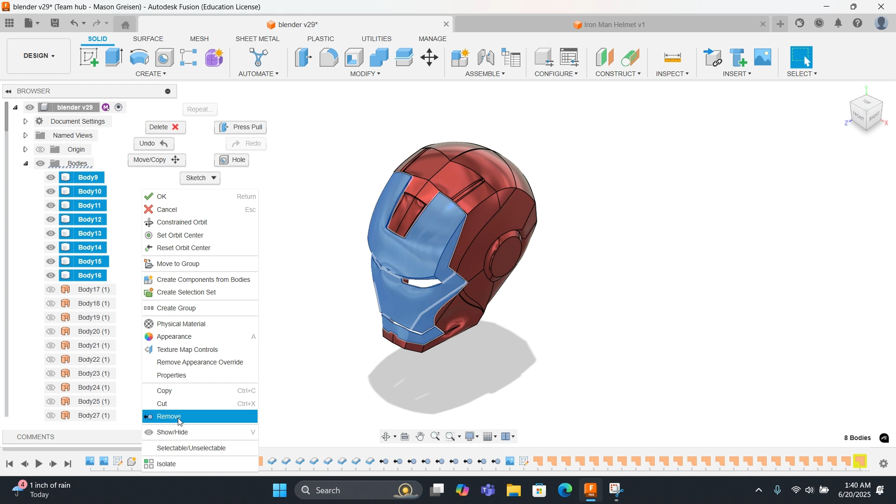Today we are going to be completing this Iron Man helmet. Right now, all we have is the golden faceplate, but in this video we are going to be making this part of it. And it's going to be less complicated than you guys think, but still pretty complicated. So without further ado, let's get into it.

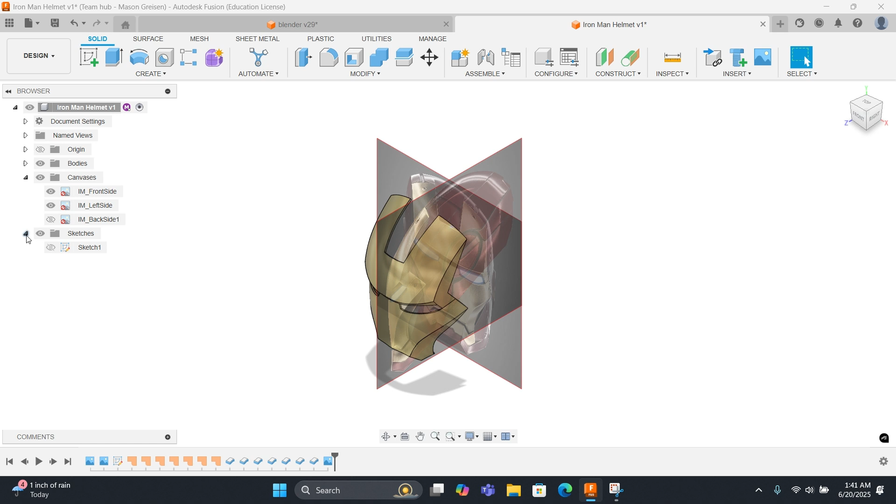And now what you're going to want to do is get rid of the other two, or actually just the front side one for now. Oh wait, actually we're going to use that backside one later. And for now, we are going to create a new sketch. So this was the first sketch with the Iron Man faceplate. And right now we're going to create a new one. And it's going to be on the same plane as before. Make sure this 3D sketch part is checked or else it will not work. Straight up will not work.

Alright, and what you're going to want to do is go to these canvases, get rid of the left side one just to not confuse yourself. And essentially what you're going to want to do is the same thing as before. What you're going to do is go to create, click on point, and on each of these red parts, you are going to create a point. So on every crevice, on every kind of corner, you're going to want to create a new point. So yeah, let's get started. I'm going to start it down here because this kind of seems like the easiest spot for me to do.

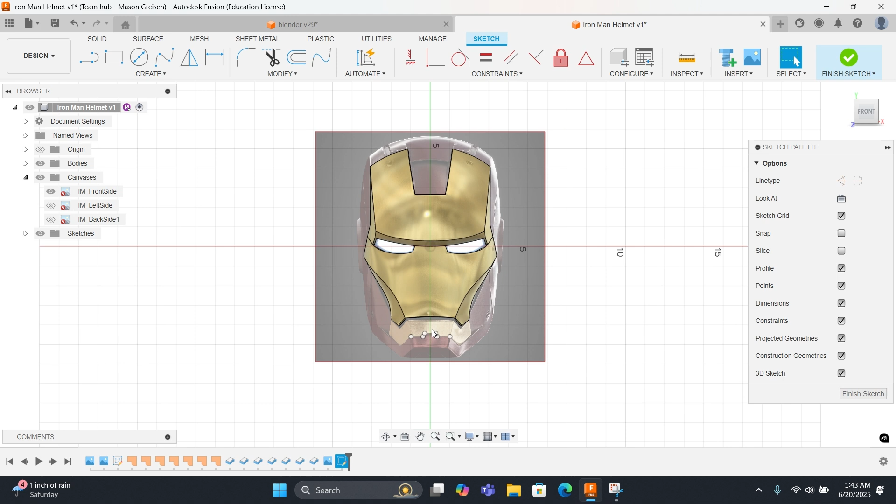So right there, and right there. Then kind of make these ones even. And that looks flat, so you're going to want to make it flat like that. Kind of just go right there and then it'll help you out. Then do that. And again, you want to not have these constraints on here, so make sure to delete them when they come up or else it'll mess it up later. And something that I actually forgot is that you're just going to want to do the right side of it. So I don't actually need any of these.

Yeah. Let's go back to the point. Put another point right here. All right. Then another one right here. Right there. Is that curved? Maybe a little bit. Let me add 3, yeah. Actually, nah, I'm just gonna make it straight because I don't think that's supposed to be a curve. It just looks like an image. Alright, right around there, there. And then you kind of want to zoom in and get these ones right.

And then I'm going to go back here, go in the middle, and then you can kind of see there's like a little indent right here. I'm also going to put one right there just because. Yeah, that looks about right. So I can do that. I'll put one right there and there as well, just in case. And then this one looks like a straight line, so I'm gonna go there. Then I can go up there. And then from here, I'm gonna go up here. And this is kind of gonna be a little bit of guess and check.

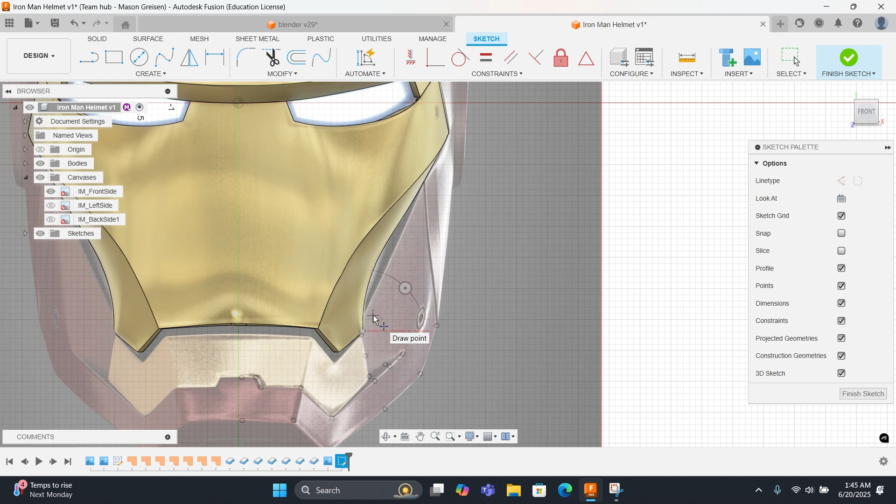Just a little bit. And then for these points, you do kind of want it to align with that edge. So you're kind of just gonna place it right on the edge a little bit. And I wouldn't worry too much about this part of it. This part's a little complicated when it comes to faceplate. I'm just gonna personally, for my Iron Man mask, line it up with the edge and not have this little indent here. Go right there.

Right there. Then I'm going to move this point just by clicking and dragging. That looks a little curved. I'll put another point right there. Again, for curved lines, you're going to want to do 3 points.

And then for straight lines, you just need 2 points. Okay, let me put one down here. Right around there. Let's go there. Let's drag that down a little bit. And then get rid of these constraints.

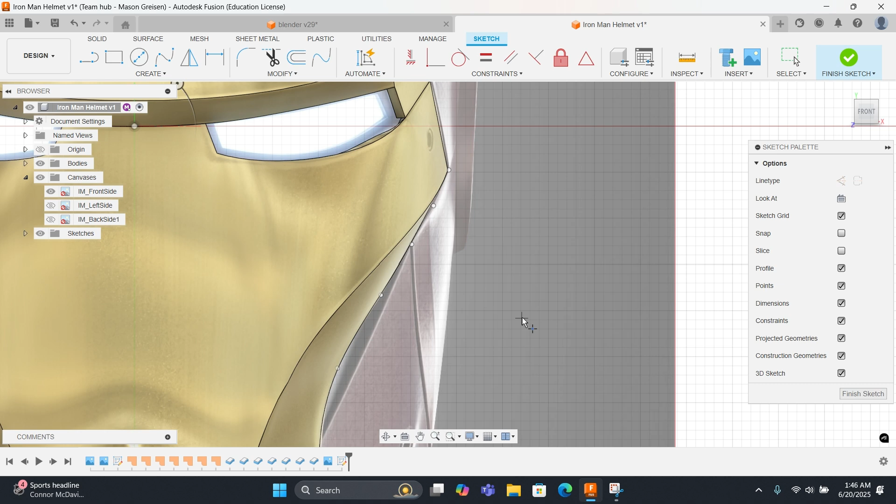And then these are the ears. We're going to get to these later. They're very complicated, actually. Kind of want to place one in the middle of the ear, on the edges of the ear. And then, yeah, that looks good to me.

Now we're going up from here. I'm gonna place it right there. Right there. Then up here. What would that do? That's fine.

And then again, get rid of these constraints. Just click on them and press the delete key. That should get rid of them. And then if you ever lose the repeat point, just go up here to create and scroll down to point. And you should be good to go.

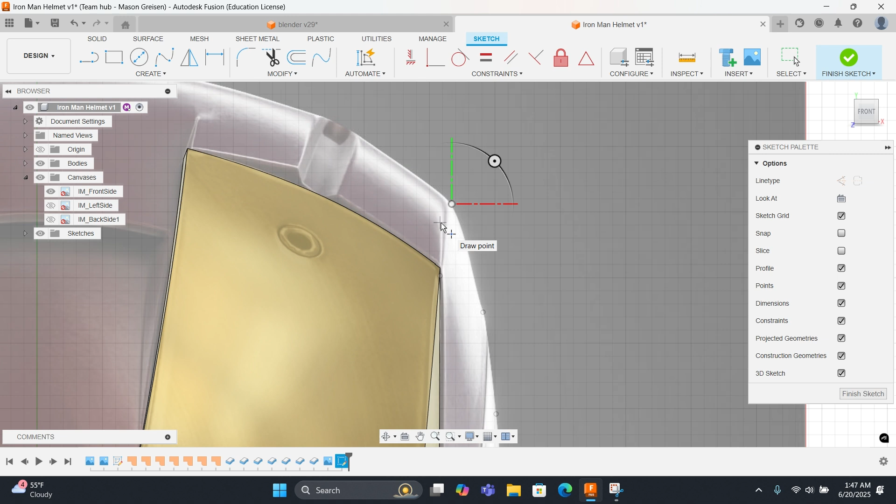Place some of these as well. Boom, boom, boom. And then on these lines, it's a little complicated. If you can't tell, they're kind of like the curves of the helmet. So I placed one in the middle there as well.

Then I'm just going to move this point, or did I even place a point there actually? Maybe not. Did I? Yeah, that's a point. Okay, I'm going to put that right there. Yeah, that looks good. All right, now we're on to the top of the helmet.

So we want one right there, right there, right there, right there. And this is kind of where it gets complicated, these sections right here. So I'm going to go over that in a second. Right there, right there. Boom, delete that one.

All right, and then just kind of go along the curve of the helmet. Remember, we do not need points on the left side. So just come down here, go there, and one in the middle. There we go.

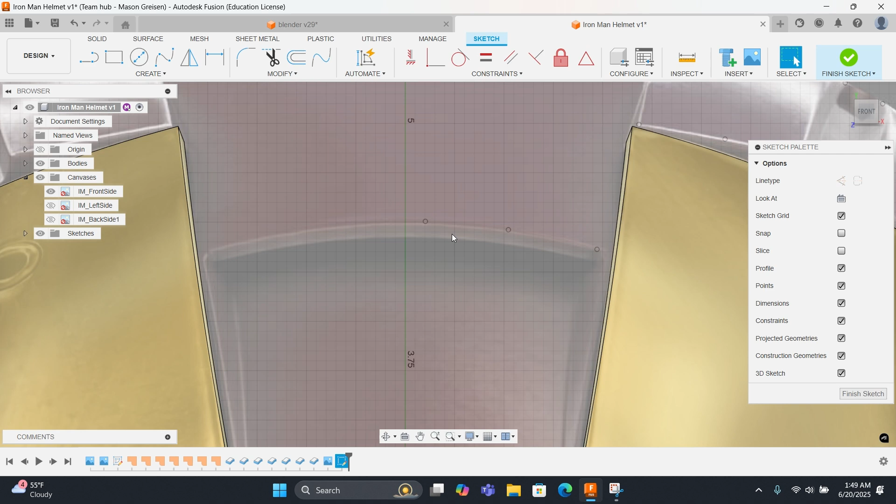I'm trying to remember if I want points directly in the middle or if I want it kind of to the right. I'm thinking it needs to be directly in the middle.

Let me actually go back here to check. Let me see. If I go down to sketches, sketch 1, yeah, all the points were directly in the middle. Okay.

So I'll delete a few of these, then create some new points, and just put it right on the center line. Sorry if I told you wrong the first time, that's my bad. And then delete that point, delete these constraints. All right.

Point, center, delete, repeat delete on that. Then put a point in the center, and I'm also going to put one right there. If it gives you trouble, zooming in usually does the trick. I did not even mean to create those. Whoops. Alright.

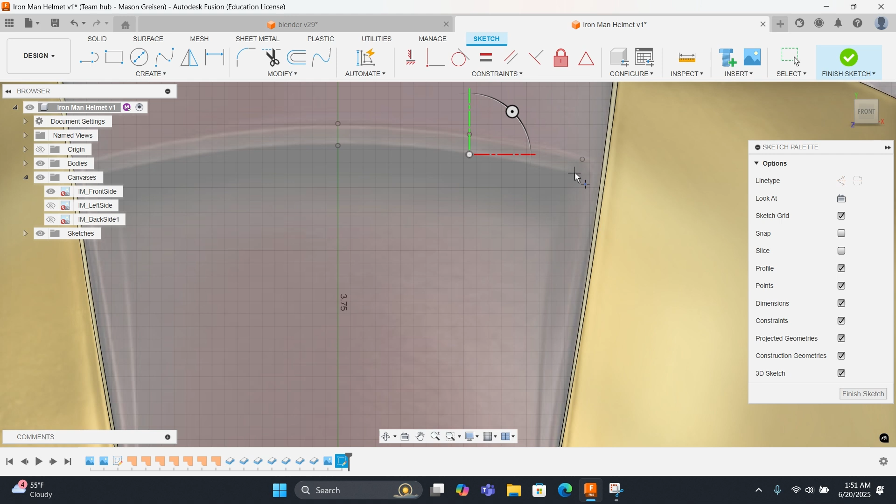Now, I need to make this. So, my tip for making this is to just do this part, that part right there, and then after that, I wouldn't even worry about like this indent right here. It's not worth it. It's just gonna make it really hard.

So then after that, I'm gonna put it right there, one right there, get rid of the constraint, and then put one up here, and right there.

And then the one that you actually do want to do is kind of this edge right here. So there's like an edge right there, right there, right there. That's it right there. And then the triangle kind of finishes right there. And again, get rid of the constraints.

All right, that's looking pretty good so far. So, yeah, this is looking good. Now we got to do this part up here.

So this part's super complicated, but it actually does look, unfortunately, it does look kind of cool on the helmet. So you want to place all these points right here, like I'm doing.

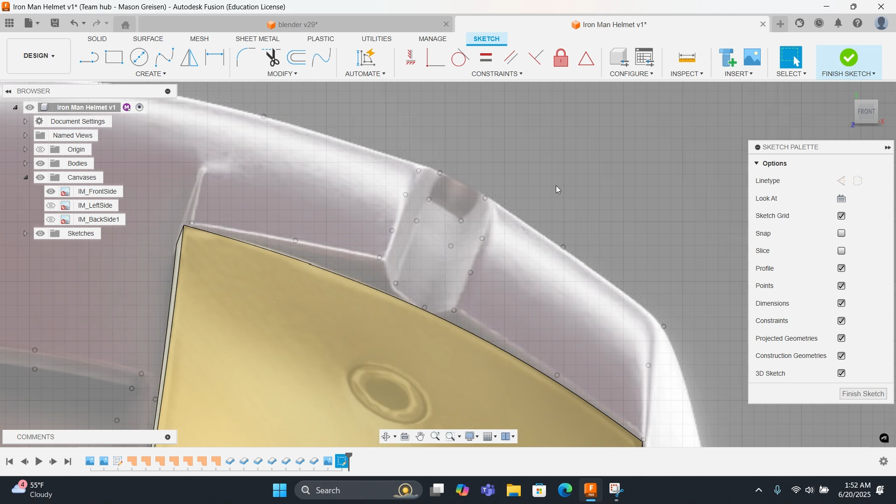Now what you want to do is you have all these dots in this plane, but you have to move it over here. Let me actually get rid of these bodies. Press V to delete them, kind of. And you just want to unhide this canvas plane.

Now what you want to do is go to your multiple viewports. It is loading for a minute. Okay, there we go. Basically go to your multiple viewports, and what you're going to do is zoom in over here, and you're going to select this and move/copy it.

I'm going to get the sketch palette out of there so that I can see the move copy. I'm also going to get the move copy out of there. Oh, it doesn't like that. There we go. Just so I can see more, you know.

So now what you want to do, that point is actually in the right spot, because anything like any of these that you see that are on the edges, they should stop - you should stop being able to see them on this plane. So you don't actually have to move most of those. That'll make sense in a second once you see the back plane, because you also can't see the back plane until here.

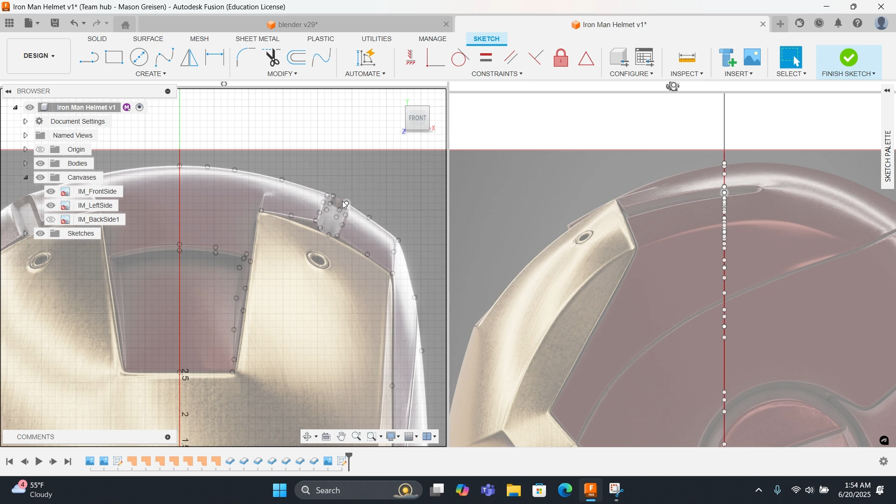So I'm just going to start down here actually, it'll probably be simpler. So this one, repeat move copy. It should be right there. Looks good. And this one, just highlight it, repeat, move, copy. And then you're going to want to drag it again. And you do want it to be in line with this one. So just kind of try to overlap them.

And this one, repeat, move, copy. And put it right there. Oh no, it's not good. There we go. And yeah, as you can see, you can tell where it's supposed to be just based off both the images.

So I think I'm going to time lapse most of this part because, yeah, you don't want to see most of this. Alright, I will be right back and I'll end the time lapse once it gets to some of the complicated parts, like up top and the ears and stuff.

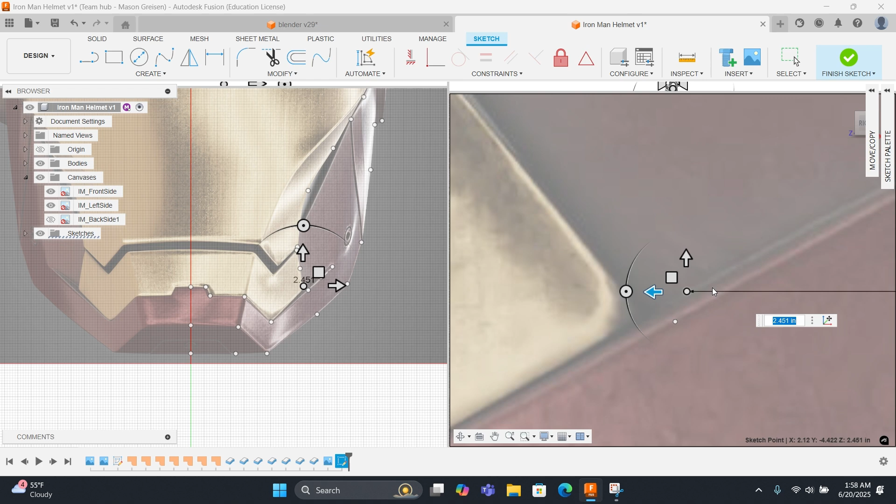Alright, so for this part, on the side of the face mask, or the side of the helmet, you can kind of see the depth right here on the reference pictures. Like, you can see this line goes right here, and it kind of stops there. That's all you need to do. Just line it up there. You can kind of see it right here too. And yeah, it makes sense when you look at it here too. So yeah.

And I actually forgot to add dots right here. This is kind of a texture that I didn't see before. So I'm going to add it right there, right there, right there, there, right there. Yeah, that looks good. Get rid of the constraints. All right.

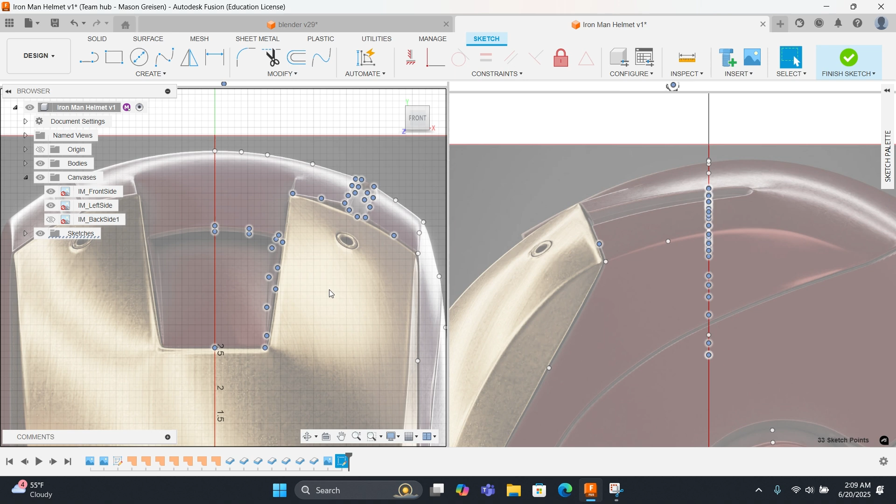All right, now we're back at the top, so we have all these points left. So what you're going to want to do for these points is kind of guess. I'm not going to lie to you, because you can't actually see anything right here. So you're going to have to guess for a lot of them.

Now for these ones right here, what I'm going to do is just move copy them. And for this one, I can tell it's actually right on the corner there, so you just want to put it right there. And then for this one, I'm going to start with the simple ones - you literally just put it right there on the edge.

Same with these, you can kind of tell where it's supposed to be - not really based 100% on this picture, but based on where it's already at in this picture over here. Because now you know that this has to be at this height, so you just need the horizontal distance that it needs to go. And once you get it there, it kind of matches up. Go right there with it. Yeah, there we go. And then I'm going to do this side of it. So these should be pretty much right next to each other, which they are - you can tell because they're just on top of each other right there.

I'm going to do this one. This one looks like it's a little bit backwards. It's alright, there we go. And I'll do this one. This one should be forwards. Yeah, it's basically right on top of that. So there you go.

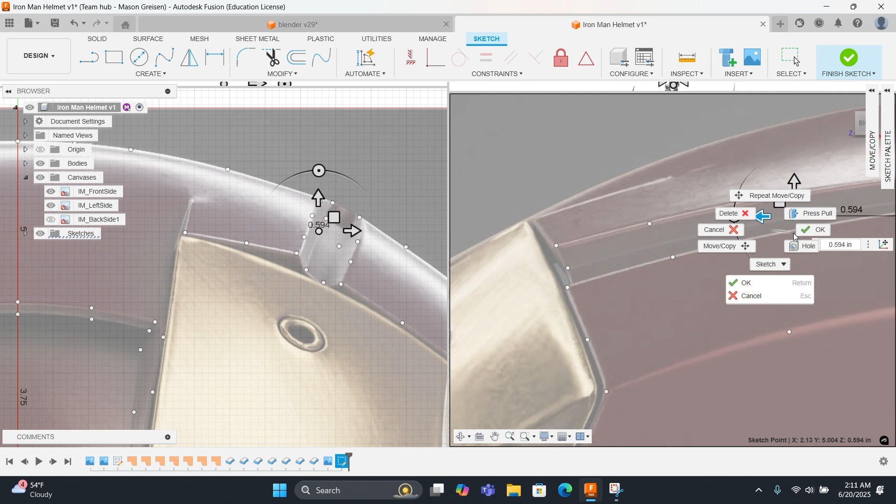I'll move this one as well. This one should go backwards. And for this one, you kind of have to guess based on this. I'm just going to put it, I kind of want a little bit of a forward curve, so like diagonal. So I think I'm going to put it right around there.

And now we're on to these ones. So I'm going to do the same exact thing with this one. I'm just going to put it back, but diagonal to this. So these should be right on top of each other.

And then for this one, I'm going to do something similar. Where is that one at? It should be... backwards a little bit, I think. Yeah, because this one, hang on just a second. Oh no, it should actually be forwards. It should line up with this one right here.

So basically, you're just doing all the ones that you can see, and then the other side should be symmetrical with it. So I'm going to line that up right there. And then this one can go forward. Should be lined up right about there with this one, just diagonal with it.

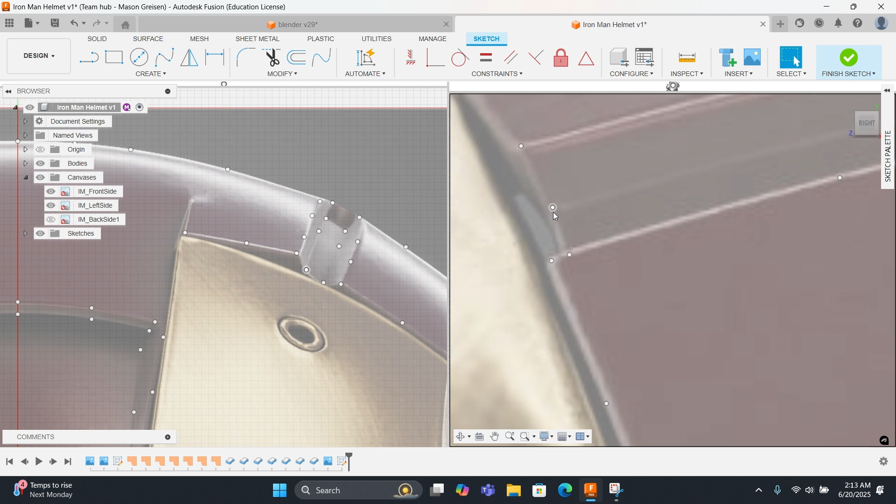Alright, and that's actually most of them done for this section. Now we're on to this section. So I'm just going to do the simple one, moving that to the front of the helmet. And this one to the front of the helmet. Right there. Alright.

And to kind of double check our work, what I'm going to do is this, so we can kind of see what we've done so far. And yeah, that looks pretty good. I'm looking at these dots right here, and you can kind of tell that it's like a little line of dots that has a little tiny indent. Yeah, that looks pretty good. Alright, back to normal.

Alright, so what are we on now? I think we're on these dots over here. Yep, because all of them are still in that plane. Alright, let's start with the ones that we can see. I'm going to do this one. I'm pretty sure that that's this part sticking out. I'm pretty much positive.

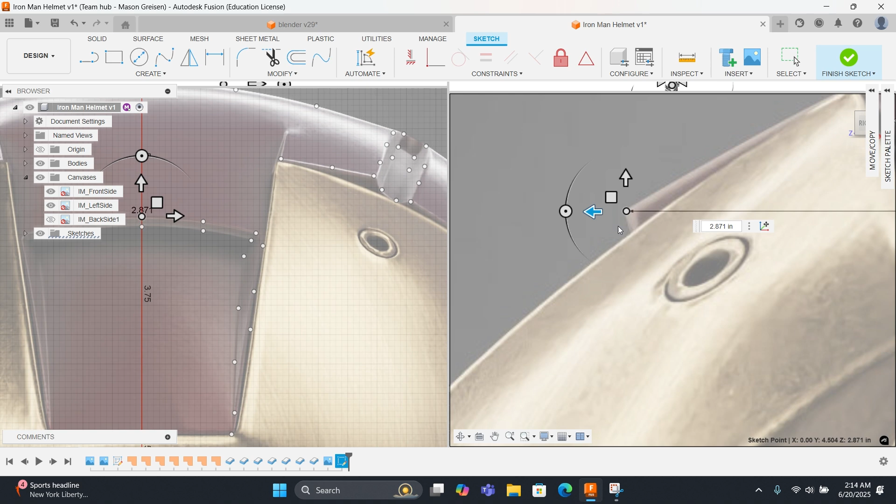And then we can do this one again. It's going to be on that curve. And now I think we're to the point where we can't actually see it. So what I'm going to do is just keep following the curve. I think it would curve down like that because it's kind of going like that so far. And yeah, I'm kind of just guessing here.

And this one, I'm just going to do perfectly in line with our first dot, just straight up and down. There we go. Then I'll do the same thing for this one, except obviously the second dot. That looks good... for this one. Boom, right there.

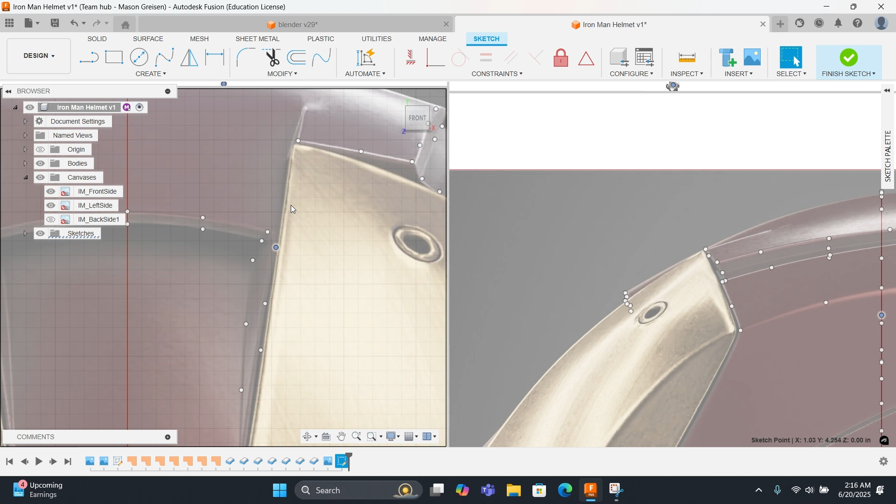And now we're gonna have to do this side. So I'm just gonna line this up with the edge of that, because we should kind of not be able to see it, but you kind of know what I mean. I feel like that should be more lined up than that. Hmm. Yeah, I'm gonna put it a little further back, kind of right there.

And then for this one, we're gonna move it again. Just right here. Kind of following this curve the same distance away as before. If it's the same distance, it should be about there.

And then we're going to do the same thing here. We'll move that to right there, kind of right before the glare. Just the one we just moved, okay. And then eventually it should get down to this corner right here, which it's almost there. This one should be at the corner.

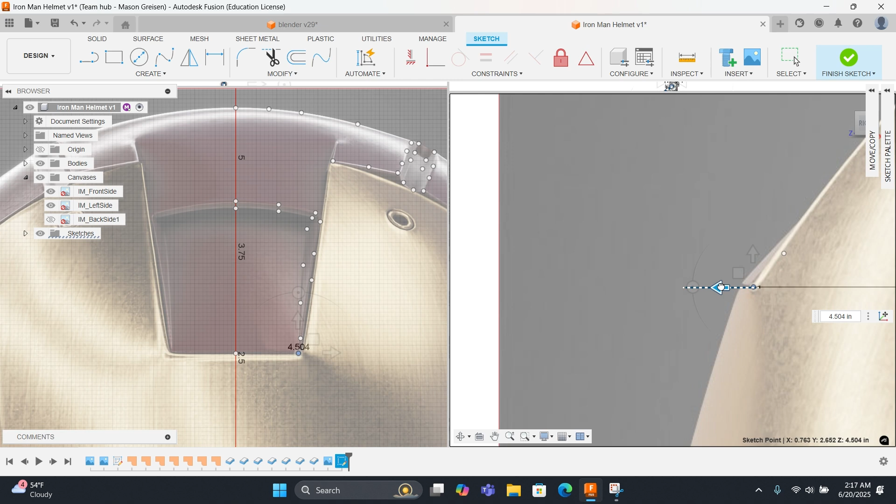There we go, perfect. And then it kind of sticks out a little bit for this one. So I am going to not put it perfectly in line, but actually like that, so there's a little bit of curve to it.

Now for these parts, what you're going to want to do is kind of eyeball it. So this is that one, and it needs to be down and to the left of it. On this screen we can only go down, and on this screen it's to the left. So that should be right.

Then we'll do the same thing for this one. Should be down a little bit. Down and to the left of this one, so I'm going to go right there - that's my best guess.

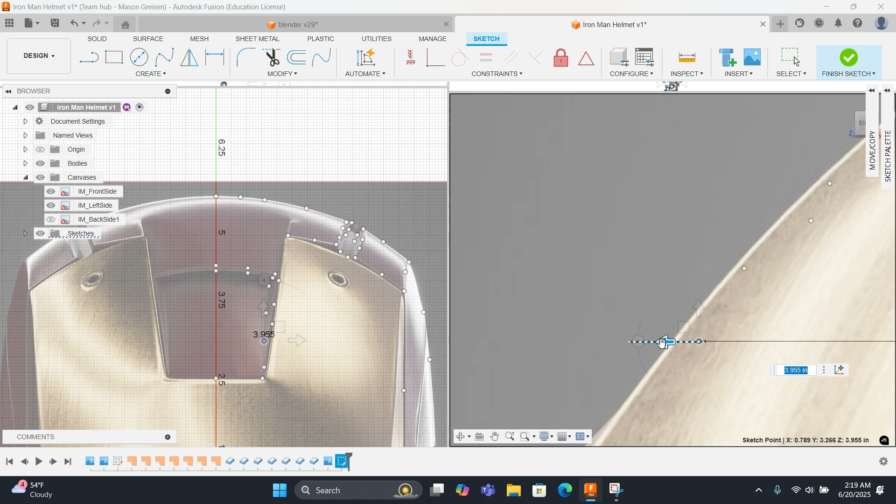And then I'll do this one. My best guess for this one is right there. If that one's right there, and that one's right there, and this one should be right around there. Looks good to me.

Is that all of them done? Or are these two? Yep, those two are right there. Then these ones are right there. That's fine, because that's all that you can see right there. Except I am going to put it a little bit more in line on this side. So this should be right there, and that should be right there. There we go.

All right. Now, what we want to do is kind of check if everything looks right.

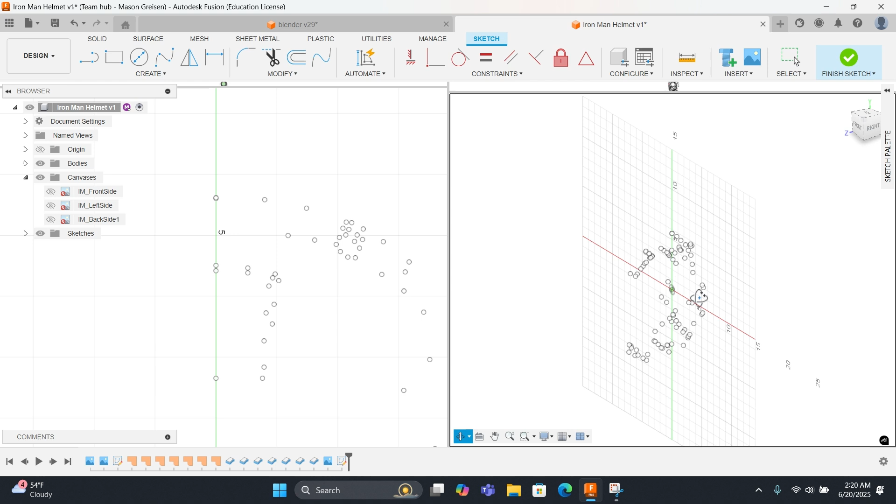And you can kind of tell that this is looking like an Iron Man mask. These all look good up here. These are kind of like the more complicated ones that we did, and they look pretty good to me. I have no complaints, honestly. And then this part looks good as well. You can kind of see a general outline - you can tell that's a face mask, especially if you put this with it.

Yeah, that looks good. Alright, let's keep editing the sketch though.

So now, instead of using this - whoops - instead of using this, we are now going to use this. You're going to want to flip to the back side. And now what we're going to do is put a bunch of dots around here.

So what I'm going to do is get out of the multiple viewport, go single view, and I'm just going to put dots wherever I feel is necessary. So we want to go to the back face, and I'm going to put some dots right here, here, here, here. And I'm not going to worry about all this.

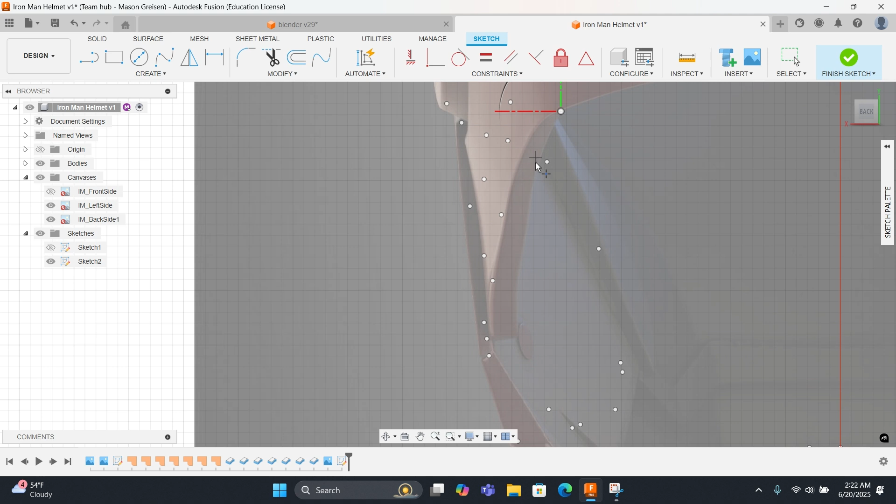What I'm going to do is base it off of this edge right here. So I'm going to go right there, right there, right there, right there, and there. And then all that is the front, so we don't actually need anything right there.

What we do need - see, where did I just create a dot at? Right there. Redo point. Do I need these ones? Yes, we do. Okay, we're good.

I'm gonna move this one. Wait, is that the one I just created? Yeah, it is. Okay, I'm gonna move that one right there. Then delete this constraint. Okay.

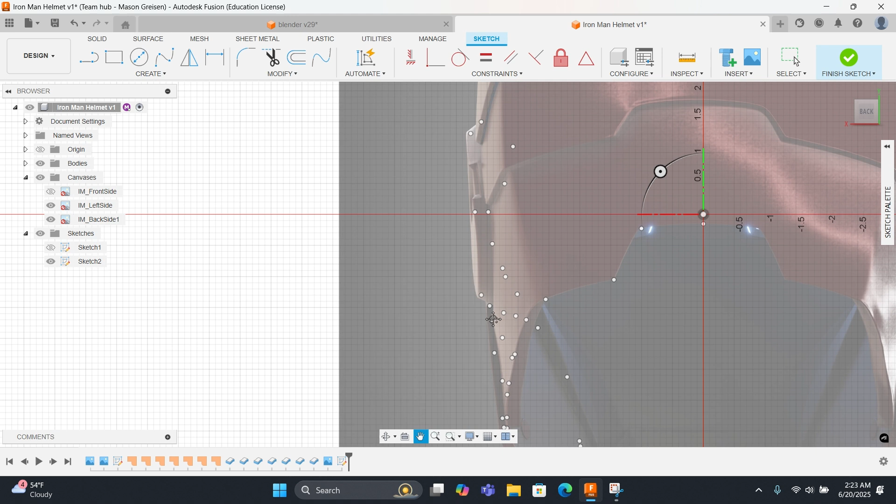So the most important part of this one for the back parts is going to be kind of going up the side here. So what I'm going to do is go to the ears, put a point right there, and right there, right there. Actually, I really don't need that point - we already have those side points. But you do want to put points on the back of the ears, so right there and right there.

And then the other parts that you definitely are going to want to do is straight up the middle right here. I'm going to do it right there, right there, right there, right there. And then up here, we already have points for that part, so I'm not going to touch that.

But every point that I put in the middle, I am going to put some points kind of like for here and then here. So you're going to want to do - where did I put this point at? Yeah, what you're going to want to do is put some curve points right here and then right there.

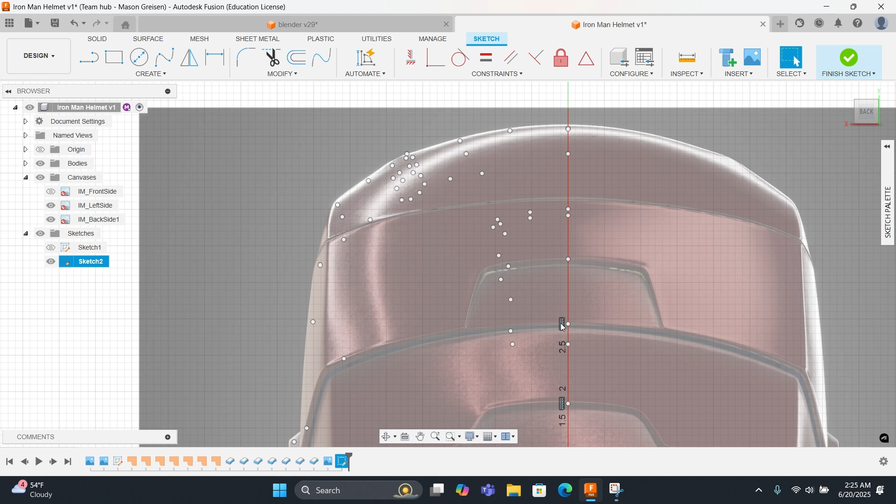And get rid of these constraints, they're just going to screw you in the end. So basically for each of these points in the middle, you're just going to go out and put 3 points total. Boom, boom, boom, boom. One in the middle and one on the edge.

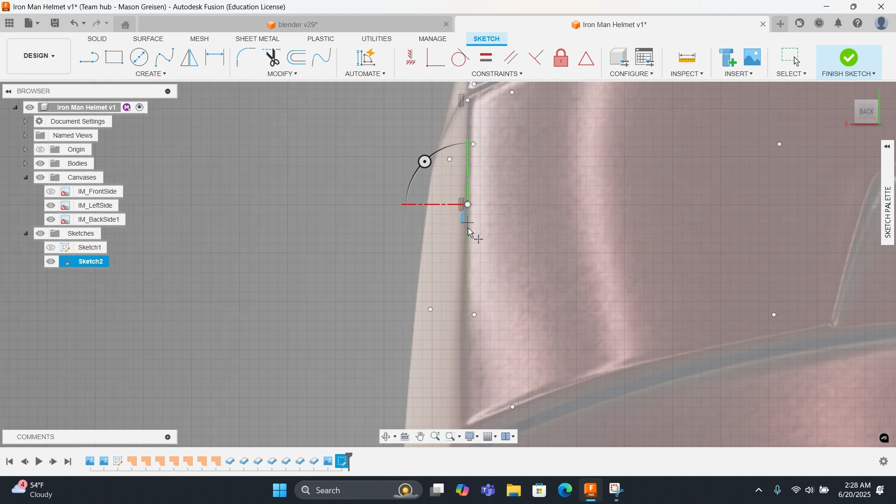All right. And then after that, you're going to want to add some points over here - kind of this curve right here and this curve right here. So you're going to go along this curve, boom, boom, boom. Delete that constraint. And then along this curve, boom, boom, boom. And along this curve.

We'll probably connect these two. This one, what is this one? Nope, not that one. All right, now you're going to want to go back to your multiple viewports. And if I miss something, I will definitely go back to it. But I think that's everything.

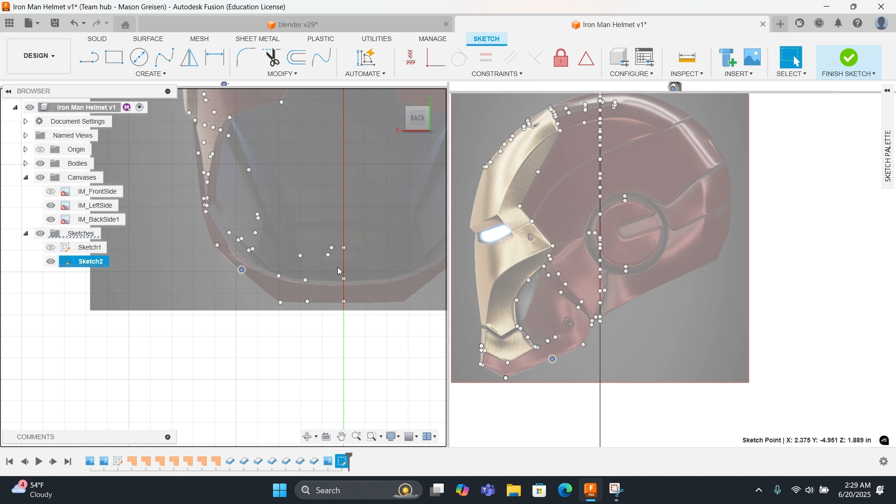So this one, it's just up there. It's also up there. Flip that around. Yeah. I'm going to start with some of these. I'm going to start with this one. Seems the easiest. All right. So that one, you can tell, is just right there. Along with this one. Around the same. Right there.

And this one also goes back there. And we need a few going down here. I think I placed a few. Yep, right there. Just gonna go back here. And maybe this one. Yep. Goes right there. It's good. This one goes around there. And this one does the same.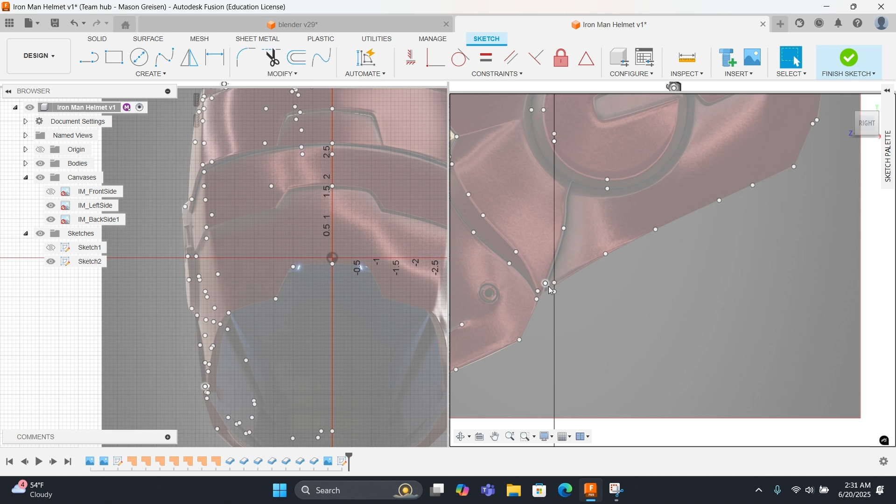We got a couple of these ones. This one doesn't go too far, it goes right around there, and then this one goes in the front, right there. That looks good. These ones should be the ears, yep. The outer ear. I actually placed these in almost the complete wrong spot. These need to be way up here. Just even the ear, man. What is this? Yeah, those two are the first ears, and then these two are the second ones.

Okay. What I'm gonna do is I'm gonna move them up to the first ones, because goddamn. Then I'm gonna put them back here. Put this one over here. Yeah, that looks about right. All right. This, you can't exactly tell where it goes. So I'm going to put it right there. That looks about right.

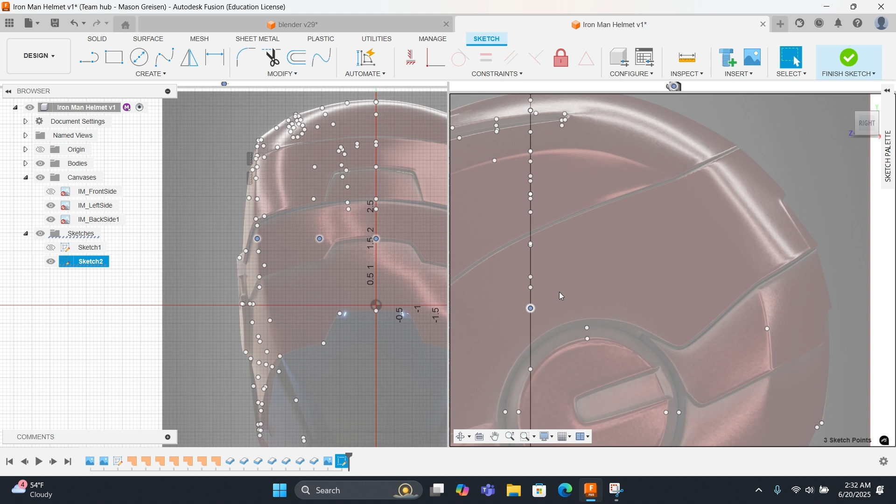And this one, that's actually 3 of them. Okay, I'm going to start with this one. I'm just going to put it right there. And this one, I'm going to put it in the center, right around there. And this one goes at the back where you can barely see it anymore on the screen, which should be right there. Yep, looks good.

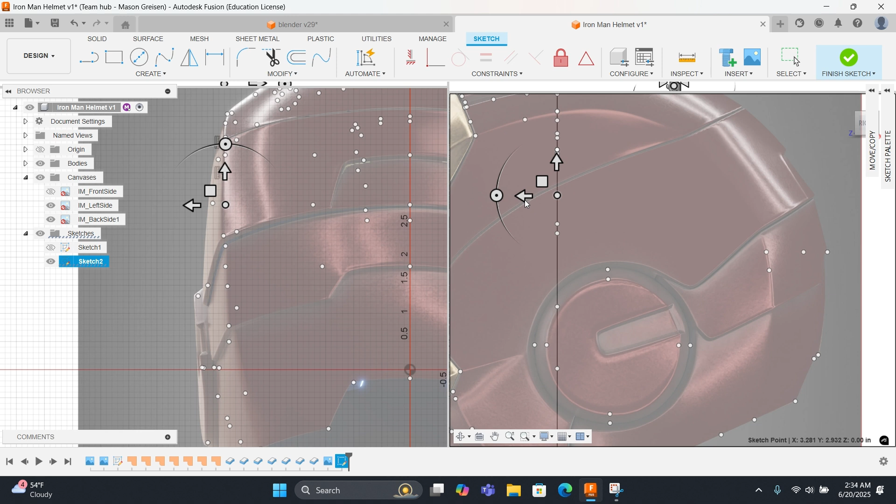This will probably be 3 as well. Oh no, that's just one of them. What's the next one? Also just one of them. Interesting. Not exactly sure if I need those. Let me see. Yeah, I'm gonna put this one right there. This one, oh no, it's not good. This one right there. And then this one right there. Alright, sweet. And this one will go right there.

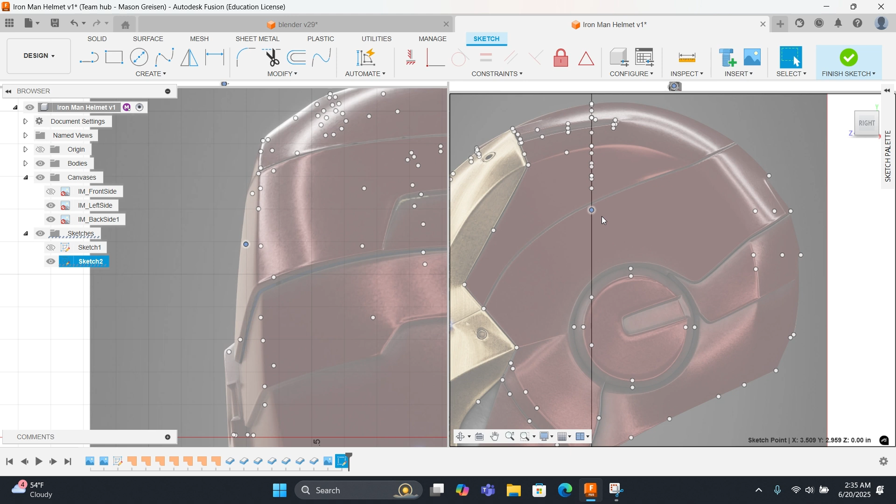Not that one. What is it? I'm wondering if this one is actually from the front. Yeah, it looks like it is. Wait, no it doesn't. Why would that be there? Why? Yeah, I am just gonna delete these because there's almost no point in them. Yeah, this one looks like it should be also pointless. Damn. This one. There we go. That's something useful. This one will go right there on the edge. Whoops.

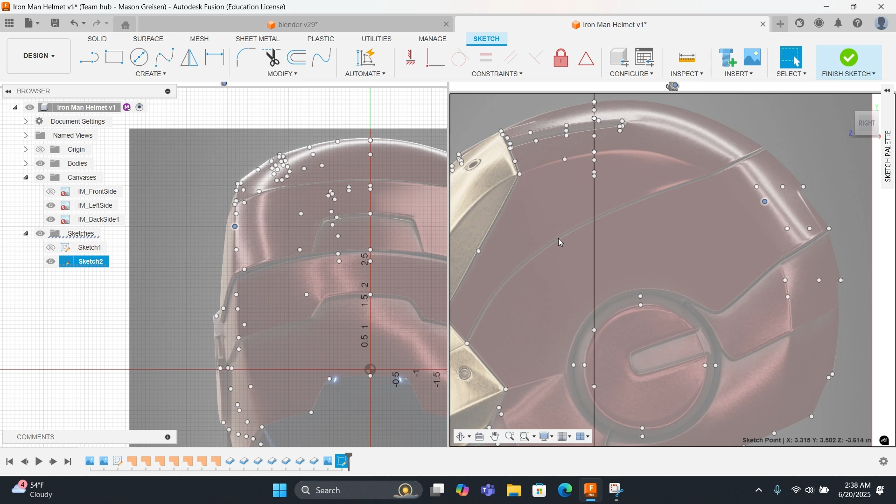These 3. This one doesn't look very useful. Yep. Yeah. This one should be in the middle, right there. This one should be on the edge, right there. What is this? Okay, looks good. I'm gonna guess that goes right there. Not exactly sure though. Alright, let's get these in the right places. This one should go all the way back. This one should go in the middle. And this one, I think it was, maybe, yeah, this one, go on the edge. There, where it is. Okay.

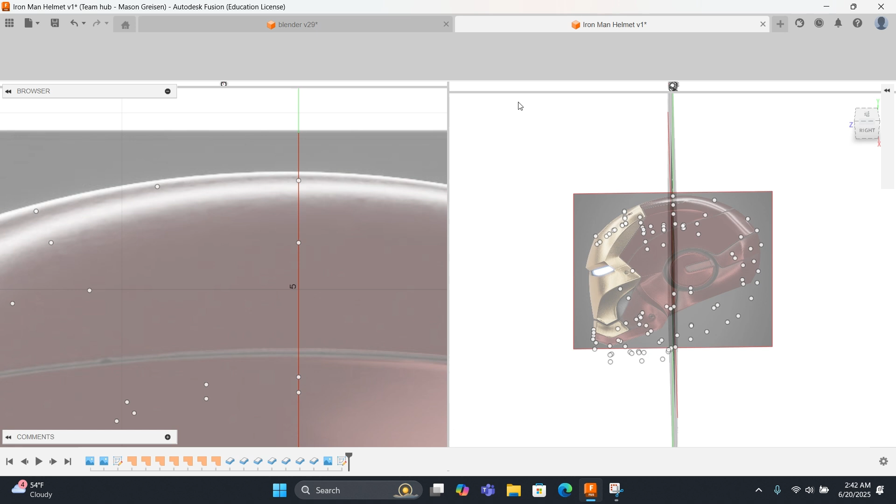Okay, now what I'm going to do is compare all these dots to all the dots I have on my other one. So it's looking pretty good. Yeah, I think it's actually time to start connecting, and if we're missing a few dots, then we can add them. Alright, so here's what you're going to want to do to connect them. Go to the side view on this one, and then the front view on this one, and you're going to want to get the front side view back and just kind of rotate over here.

And you're going to use the fit point spline tool. We did this in the last video, so it should not be too hard to remember. But as you can see, I just completely messed that up. So I'm going to go fit point spline, click on these three dots, and boom, there we go. As you can see, it worked over here. Then we connect these two like that, because that is a shape that we want to make.

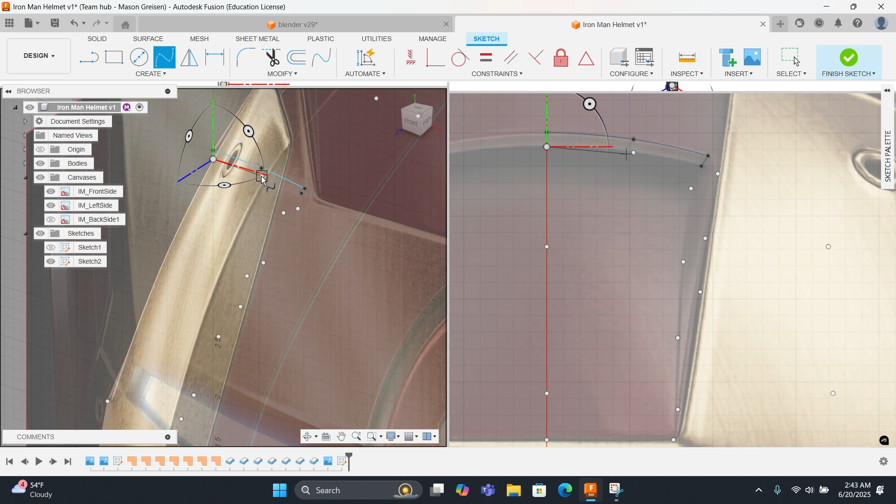Looks good. Looks good over here as well. And then I'm going to angle this the other way, just to make it a little better for me. So now what we're going to do is connect this with this, I think, and then that one and that one. That would go over here. Yeah, it does. Sweet. Perfect.

And now what we're going to want to do is connect. Where did it go? There we go. Connect these three, and then four, like that. And it looks pretty good right there. And then I think I'm going to connect this to that, like that. And then this one to this, like that. Does that look good? Yeah, it does.

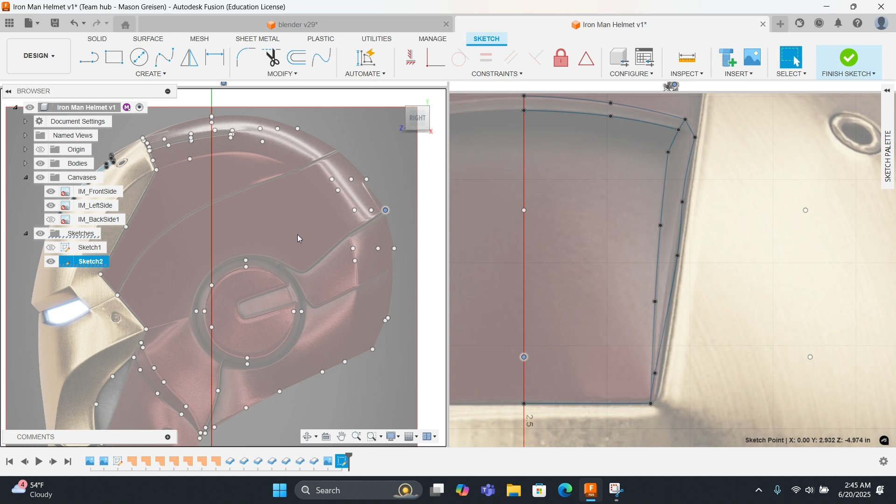Sweet. Now I'm going to go back to this view, how I had it before. I'm going to connect here to here. Oh, did we not move one of the dots? Where is this dot? Oh, we moved it back there. Oh, no, that's just the wrong dot. Okay, that makes sense.

And if you can't tell, when you do the fit point spline, you can't actually select anything until you shift and middle mouse button over like this. And then now you can select any of the dots. It just has to be slightly angled. So now we're going to want to connect this to that, to that.

Why does that look so weird on this screen? Oh, because it is. Because it's really just here to here, right? Yeah, because this dot is in the back and so is this one. Okay, yeah, that looks good. What other dots do we need? Okay, fit point spline. Now we go from here to here, I think. Yeah, looks good. Looks good to me.

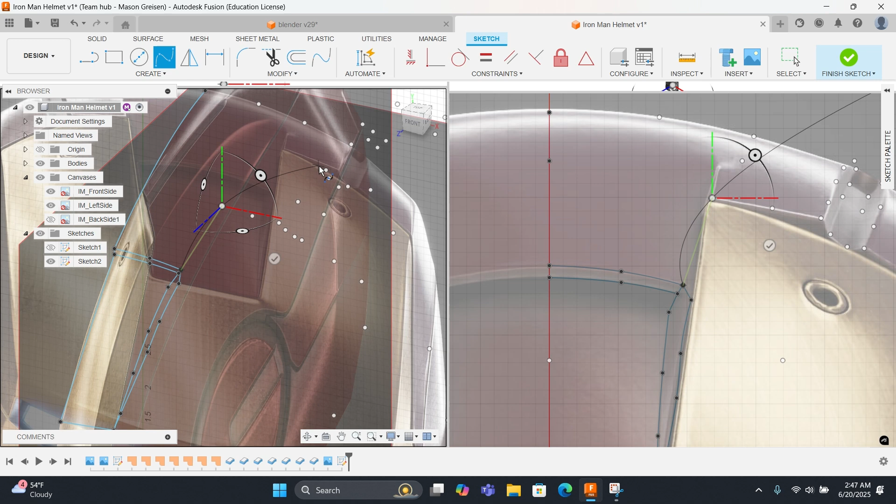All right, next up is these. So I'm gonna go from here to here to right there. No, to right there. Because this dot is in the back. Yep. Okay. Sweet. This is gonna take a very long time.

I think I split it up into multiple sessions the last time I did it with my other Iron Man helmet, because that's how hard it was. It was multiple days of designing. But I'm trying to put it all into one video for you guys so I can make other videos on how to make the actual Iron Man helmet in real life. Hopefully this video is less than an hour. That's kind of my hope right now. I don't know if I'm going to get it to that, but we'll see.

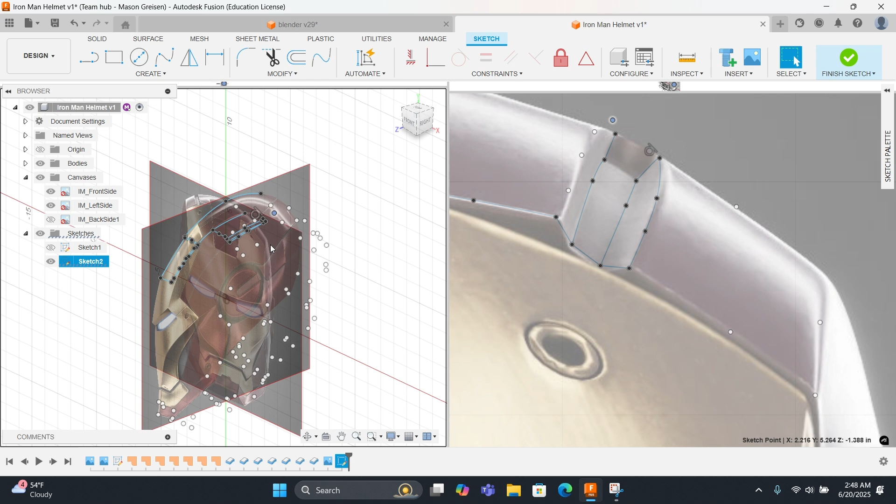There we go. That'll go right there. And this will go to the front. This part's a little complicated, so bear with me. But it's looking pretty good. This should go right there. And what is this? Shit. What is that dot? Okay, that dot's in the back, right? Yeah, it is. Okay. Don't need to connect it to there.

Damn, I'm doing it way too much. Okay. Just do a slight movement. There we go. I'll connect. Oh, I didn't move it at all, actually. Okay. Connect there to there to there. Oh, misclicked. Okay, there to there to there to there. Okay. And then I think it's from here to here as well. And just from there to there.

Actually, I kind of want this all to be one thing. Yeah, definitely. So I'm going to go from there to there to there to there to there. Okay, there we go. Perfect. Looks pretty good so far, in my opinion. Alright, I'm gonna go from there to there to right there, I think. Yep.

And remember, look at both screens. That's how I'm able to do this so fast and how I'm able to tell if the dots are right. Also because I've done it before, but you know, also the other thing. Point spline there to there. There we go. I don't know why I was curving so much before. That was crazy. There to there.

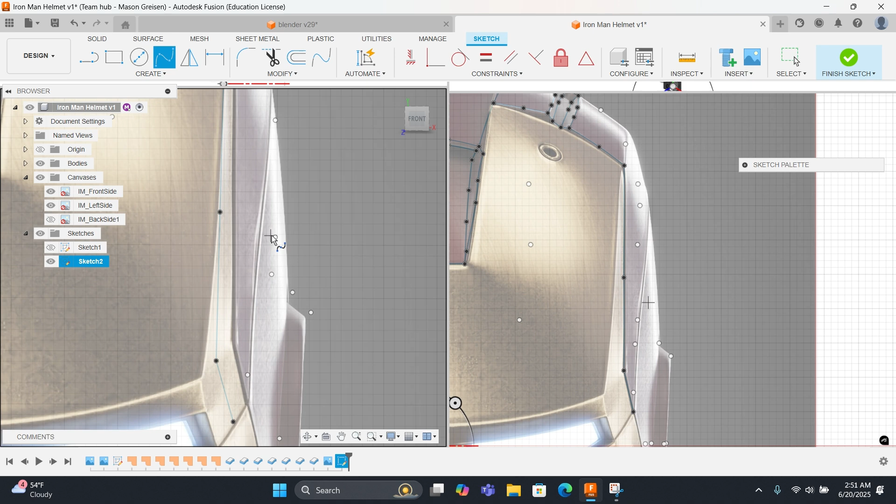Okay. Let's do some more fit point splines. That's right there. I think it's actually... okay, yeah. I don't want to do that yet. That's the back part. Might want to do this part. Maybe not. I don't really have anything connected to, actually. I need a point right there. It's fine. We can add a point right now.

Let's add point. Boom. And then move the point to right there. Alrighty. Fit point spline. I'm going to go from there to there to, where is it? No, right there. Damn, right there. Fuck, is it? Is it not updated or something on here? I don't know what happened. Where is it? Oh, there we go. Okay.

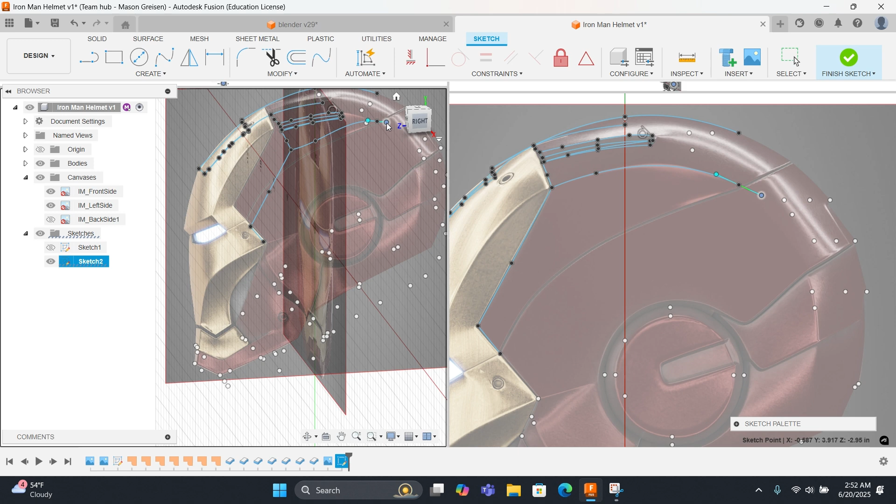Okay, I'm gonna start down here now, which means I need to go like that. Okay. Go back to front, curve it a little bit, fit point spline it. And most of these are straight, so you're just gonna wanna keep repeating fit point spline. Hit OK to get rid of those green things because they kind of get in my way a little bit.

You saw right there, I tried to get greedy. I tried to do multiple in a row, and it kind of just messed it up a little bit. Go right there. Yeah, that looks good. Maybe right there. Yeah, there we go. Try to get greedy by doing multiple in a row while wanting it to be straight, but it curved on me. Is this? Yeah, that is good. Sweet.

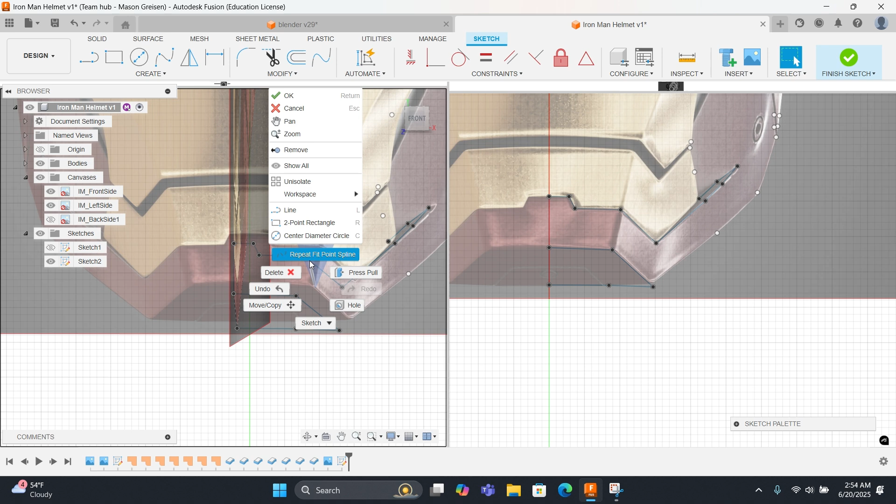Not that one, but this one we need a line connecting. There we go. Yeah, if you ever see those things get in your way, anything, just zoom in and out. That's kind of the easiest way to do it. All right.

And this is going to be an S curve, I think, so I got to do from there to there to there. Nope, shit. Yeah, from there to there to there to right there. And right there. Yeah, that's perfect. Sweet. There we go. Where is this dot? Back there. Okay, we're good.

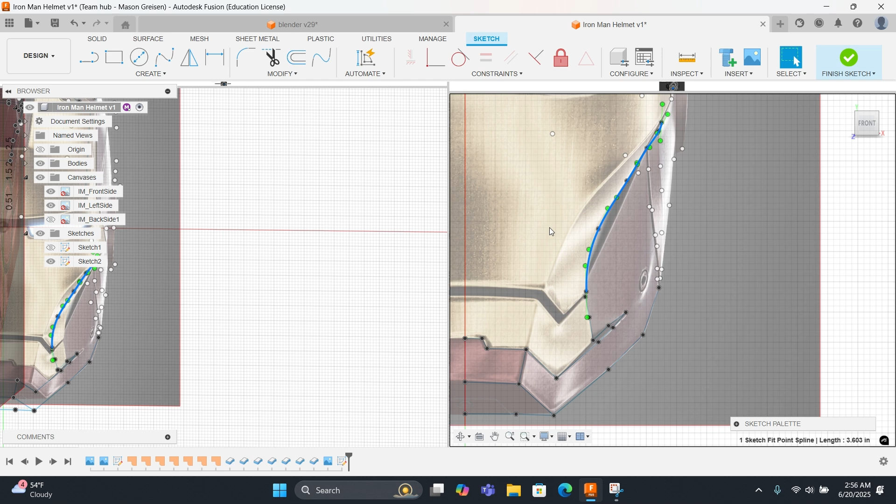Okay, now let's do some of this stuff. A little too curved for my liking. Okay, there we go. There to there. Zoom in on this thing. Okay, that is kind of a curve. Where is this dot at? Back there, that's what I thought. Okay.

I'm going to switch to the side view now. Yeah, there we go. Perfect. So now we can see where the dots are at. Okay, let's start right there. Right there. It's right there, to there, to there, to this one.

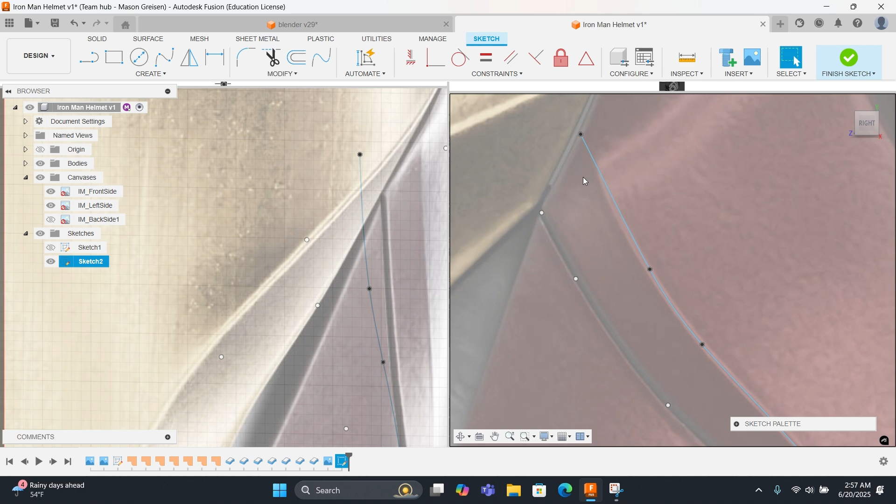Why is that like that? What is happening? I'm just gonna get rid of that dot altogether. Fuck. Okay. So I got rid of that dot, which means I have to redo this part. So I'm gonna go from there to there to there to there to there, I believe. No.

Nope. So the thing about this is when you patch it, I want to make this a section. So this and all this is going to be a section, and then this is going to be a separate section. So I can't combine this with it. I can do that separately. But if I try to do that, then it's going to screw up the patch job later, essentially. And it has to be a closed patch as well. So last time I ran into trouble where I didn't close that off, and it kind of screwed up a lot of stuff. All right.

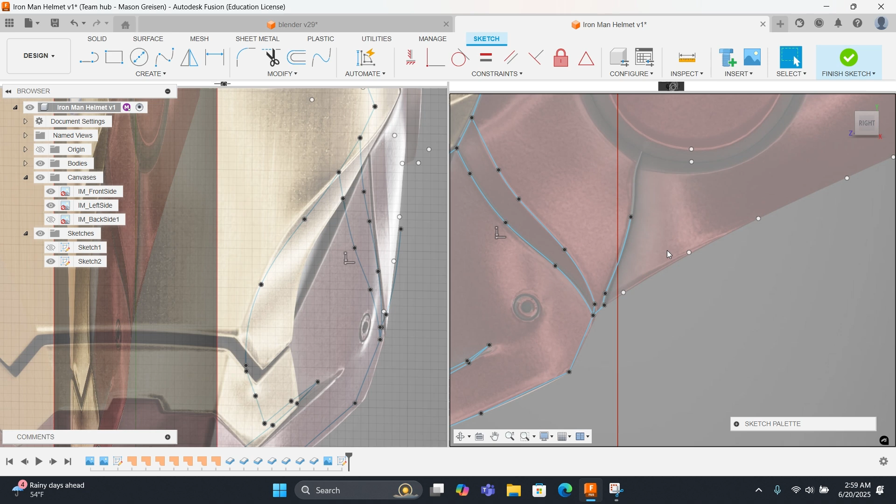Looks like this one's actually a little angled, so I can actually just kind of do it easier over here. That's nice. Okay. Go from there to there to there. Then I kind of want that curved. Okay, that looks good. There to there to there. Little curve is good right there, I think. And this should be straight along with this.

Okay. Now we are on. What is happening here? Oh, I did it wrong. Uh-oh. Did I do it wrong? Oh no, that's fine. Yeah, it's good. Now we're on to the back. So I'm gonna do that and that. Go to the back. There we go. Okay. So I'm gonna switch that like that. There we go. Then I think these three connect, these three connect, these three connect, and then all these connect.

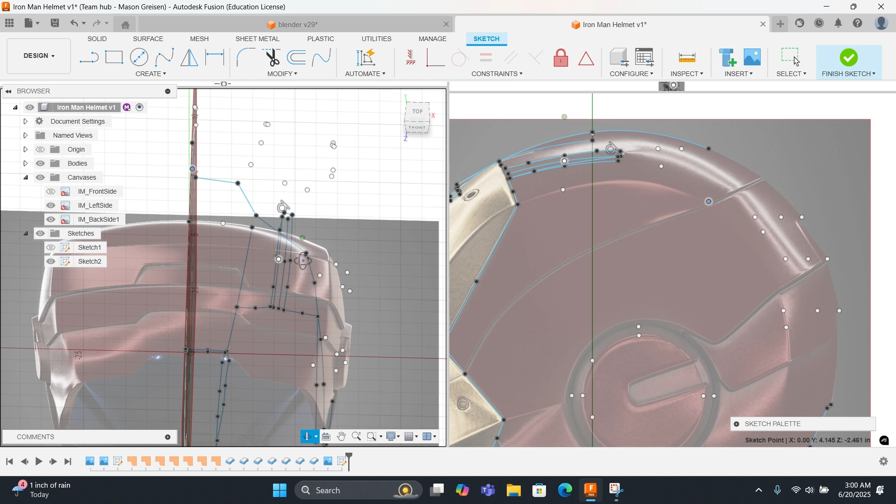What's happening here? Is that how I want it to look? Not exactly sure. Nope, that's not good. There we go. Okay. Okay. So that is actually just a random point in the middle of nowhere for some reason. What is that? Oh, I never. Okay, I see, I see. So I never actually moved it to where it needed to be, left to right. Think that is good.

What is this point? Is that the same scenario? No, that point's fine. Okay. Let's do this. Let's go to the back. A little curve. All right. Spline. This to this to this. Yep. And this to this to this. Yep. This to this to this. There we go.

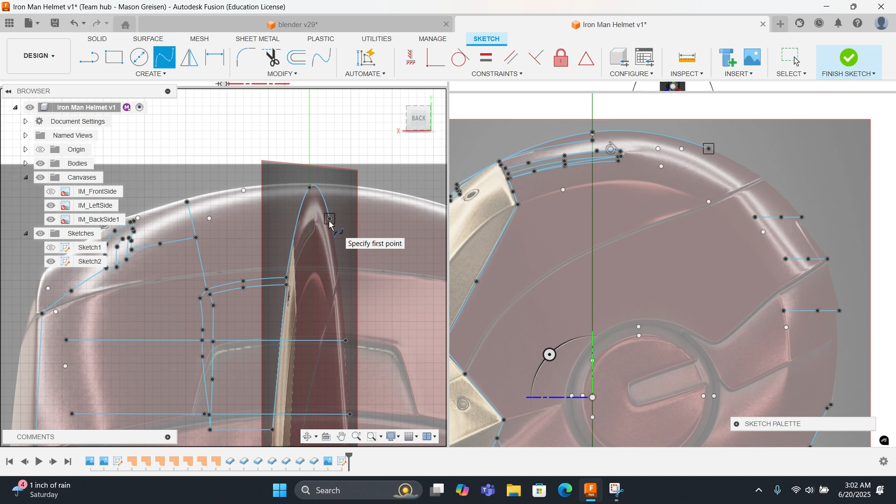Then what's the next one? Is it like here to here to here? Here to here to here. Maybe. Doesn't really look wrong. Doesn't really look right, but whatever. Okay. Now I'm going to connect all of these.

Okay. There we go. Now, I think we need to connect here. Over here. Yeah, there we go. Connect there to there to there to there to there. Nah. It's going to go there to there to there. Then what's this point? Whoa. What just happened? There we go. That's what I wanted. Okay. It's coming together for sure.

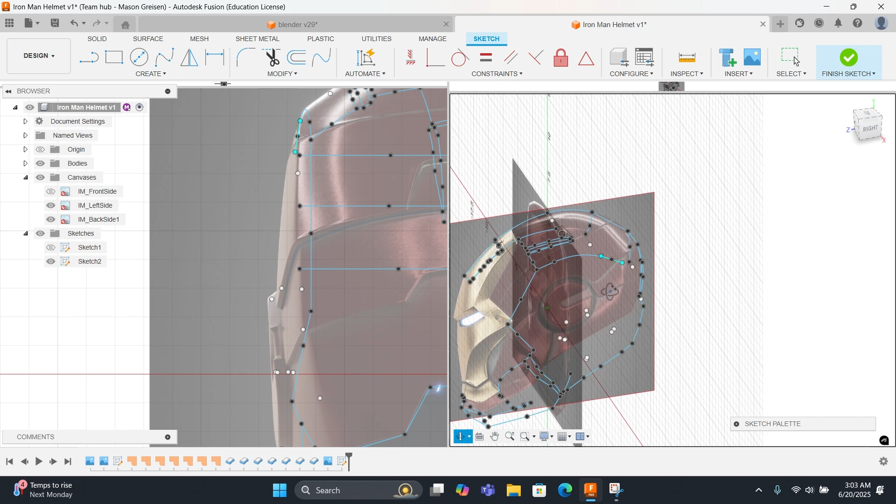Now I'm going to connect these two. And these two. These two. Okay, let me look at my other design real quick. Okay, I need a few more points here. Kind of what I thought. I'll just put that one right there. Yeah, that looks good. There, there, there. Maybe move it to the right a little bit so it's more curved. But yeah, that looks good now.

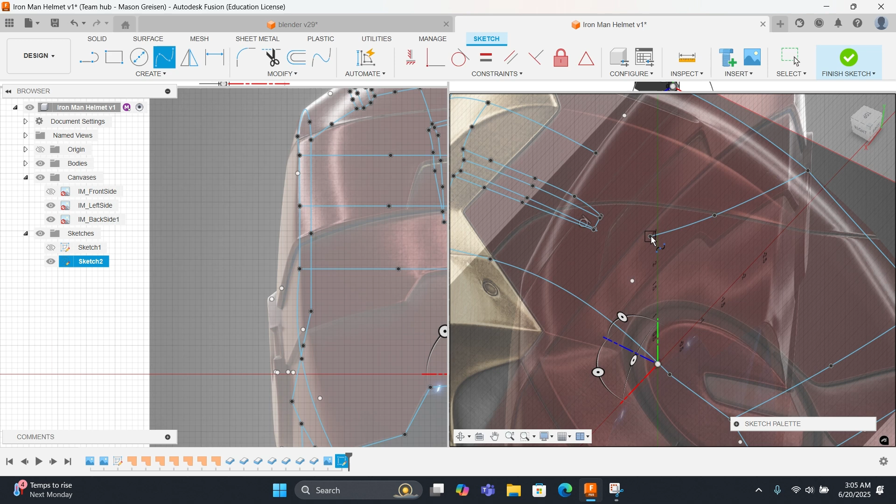All right. Whoops. Put that to right there. And what is this little thing? I'll get rid of that. Oh, I see what happened here. Yep. Okay. I think I clicked on the wrong thing again. A trend today. This should be connected like here. Boom. Perfect. I don't think I need this dot actually. Or this one. Looks pretty good. Now to do the ear.

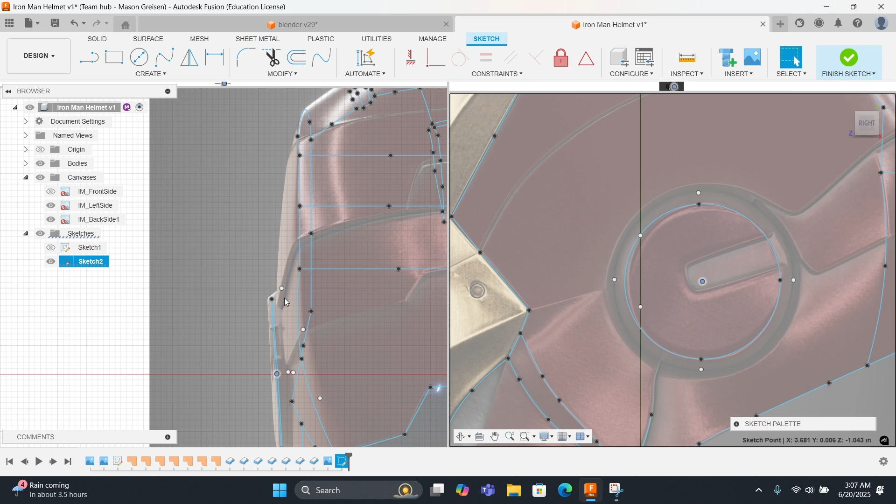The ear is so incredibly complicated that I really don't want to do it like this again because it kind of messed it up. So here's what I'm going to do. Let's try a 3-point circle. There, there, and there. Oh my god, it actually worked. I did not expect that one. Did not expect that to work at all. Holy shit. Okay, that's cool. It's really cool. So,

now that we have the circle, oh, I just deleted it on accident. Okay, now we can create another circle. God. There, there, and there. I think, what we want to do. And then kind of connect them with the spline tool. Now it's a perfect circle instead of the BS that I had before. It was insane. What is happening?

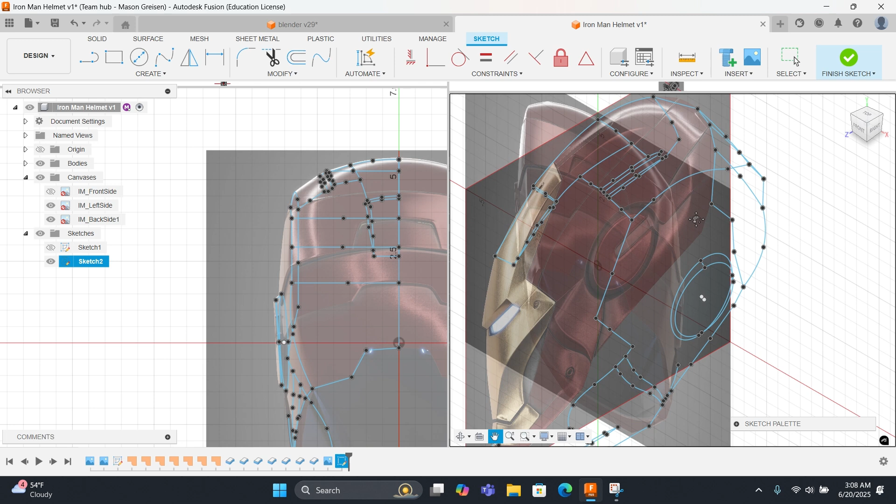Okay, there we go. There we go. Sweet. And we shouldn't even need these dots anymore. Actually, what was that last dot? I don't know what I just deleted. Nope, we don't need that one. Okay. Sweet, sweet, sweet. Now I'm just going to connect some of these to this.

All right. That is an Iron Man helmet right there. Oops. Yeah, that looks pretty dang good to me. I'm not gonna lie. I'm pretty proud of that right there. All right. Now let's get on to the next step. I know, you thought it was over. It's not. Not even close.

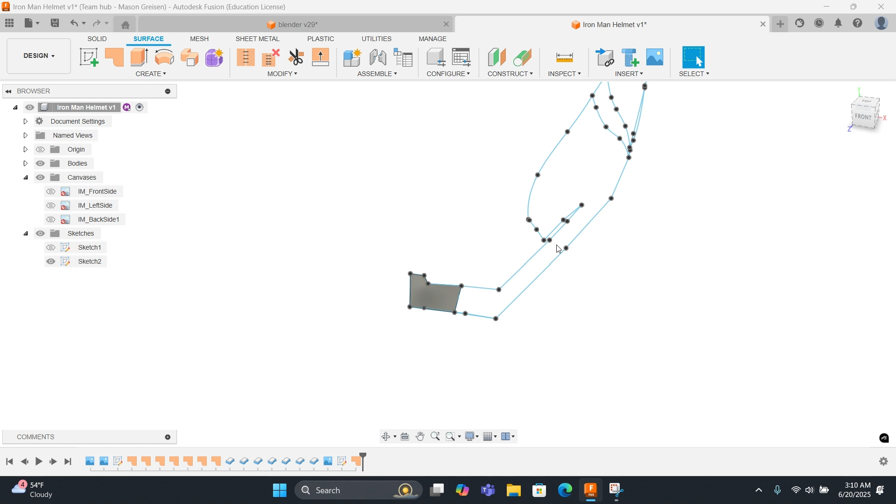Nah, it's pretty close. So what you want to do now is open the sketch palette up and then finish the sketch. And what you want to do is go to surface and click on patch. Now, what we're doing with this is we're selecting, just like in the last video, we're selecting lines. And it's going to create a very thin, has no thickness in the real world, very thin body. And what that body allows you to do is thicken it later, which we'll get to in a second, and create something that you can actually 3D print.

This one might be too big of a curve thing. We might have to do something there. Yeah. Hmm. Also, we need to edit the sketch real quick and add a line right there. Okay, let me see what I did on the last one. So on the last one, we had that, and then we had this. That should be fine, though. Should totally be fine. And that was also down there. That look right? Yeah, that looks right. Okay.

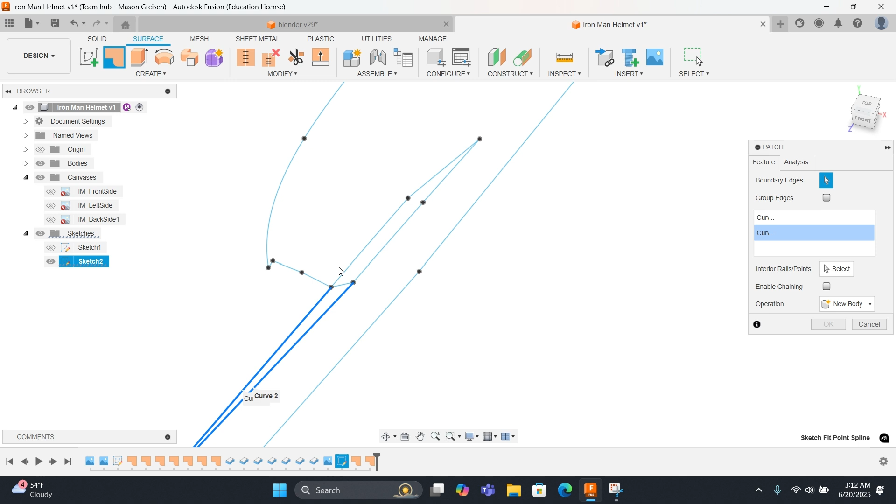Okay. So I'm going to finish the sketch. Let me do everything else and then come back to that. Okay, right here. There we go. Yeah, you're just going to want to select all the edges. Ooh, that's why I did that with the circle before. Yeah. Let me try to do it without this stuff.

But we might be screwed here because this circle doesn't exactly want us. Shit, it has to all be kind of consistent. Like it can't have half the circle in and half the circle out. So if that's the case, then we're screwed. Yeah, it doesn't like that at all. If I do it without the circle, it might work. No, it doesn't work. Okay.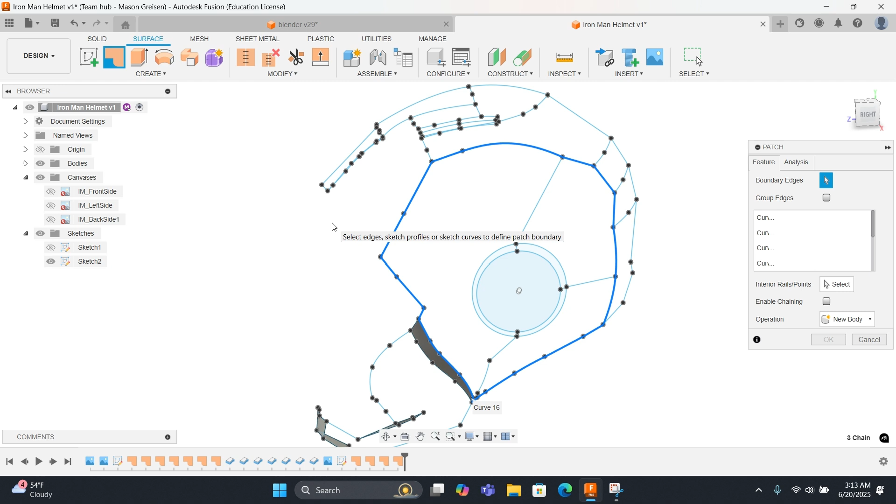Can we break this up into multiple parts in the sketch? That's what I had to do last time, was break it up into multiple parts. Let's add our points back in here. Okay. We have the right one. I think so. Oh, shit.

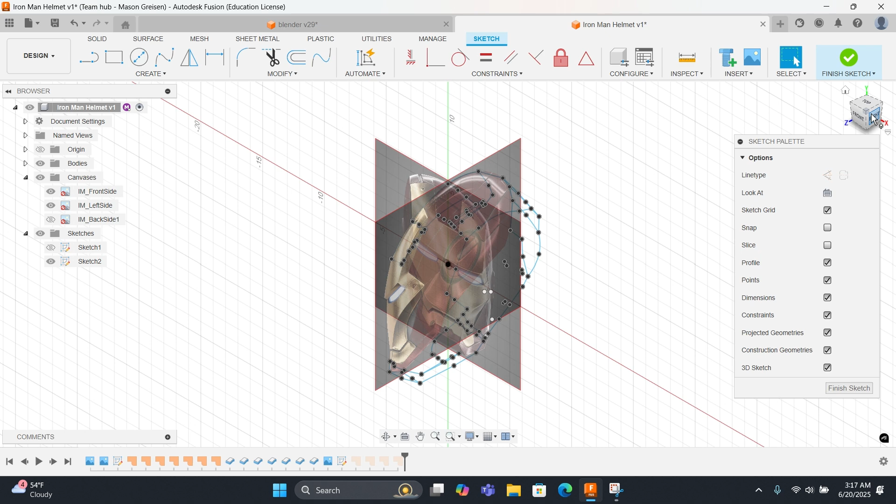Sweet, perfect. Like I said, very complicated stuff. What the fuck? Oh right, I have to do that. Okay, there we go. Pardon my French, dude. Holy crap.

Oh, that's kind of a perfect circle. Last time it definitely was not. Oh, that's why it wasn't last time, because I still have to do it the other way.

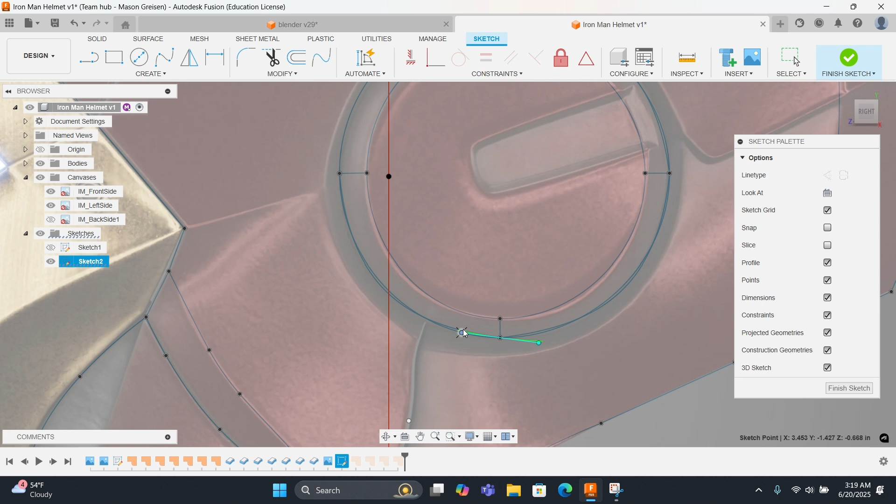I just have to eyeball this. Looks pretty good. Decent enough. Perfect. There we go, and now I can delete that outer circle. Doesn't look too bad, honestly. Obviously not perfect, but it's good enough.

There we go. Boom, there we go. What is happening, dude? Nice. Sweet, then I can delete that. Then we should be good.

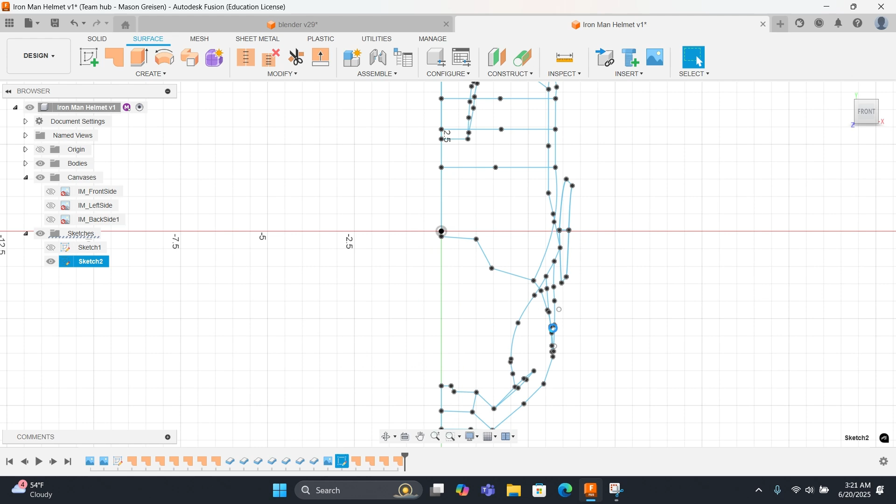Now let's go back to trying to do this stuff. All right, patch. Oh wait, we still have to - hang on. Right. Where are these? Like I need those. All right. Let's hope not.

Right there to there, there to there, there to there. And there to there. Let's do there to there as well. Sweet. Alright, now let's get back to patching it.

Fuck. As you saw, I combined all three of those. So I'm going to have to put that dot right there - or that line right there, sorry.

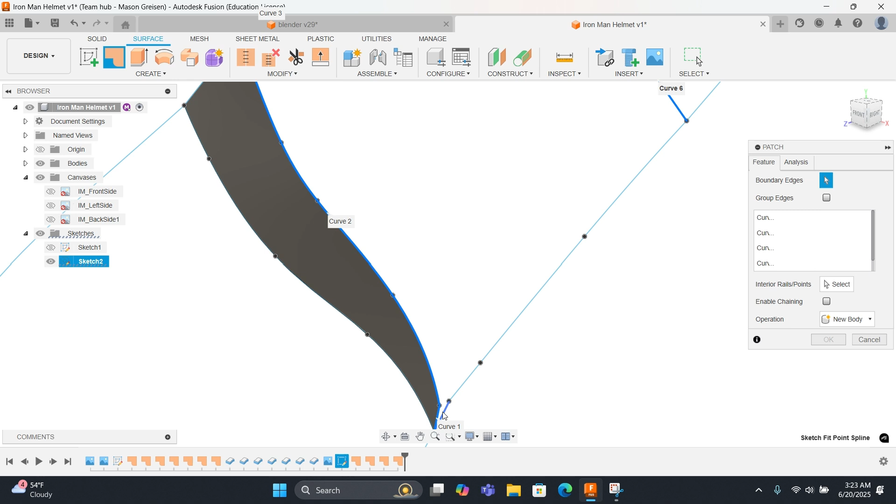Why did that just happen? Okay, interesting. Whatever, oh it happened again. Okay. Perfect, there we go, sweet. It's working again.

What did I just select? What the heck? Oh okay, I see what happened. Selected the wrong dot in here. I can go from there to there instead. There we go. Alright, let's patch this up.

Hmm, weird, why isn't it working? One of the other things I noticed is that sometimes you have to click New Body, which is a little weird, so let me try that. That didn't work. You also have to click them in order sometimes. There we go, it was the in-order part that wasn't working. Okay.

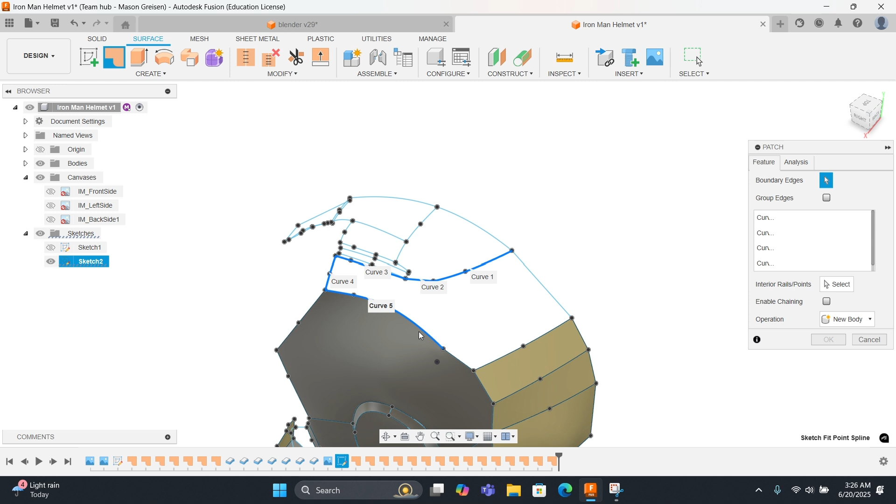And some of them are silver, some of them are gold, because it basically just means that one part's the inside and one part's the outside. It doesn't really matter until you get to thickening it, which just means you have to put a negative symbol on some of them. But yeah, it doesn't affect it too much.

I think I need to add a spline right there. Yeah, right there. Oh, I did that for some reason. Okay, let's do this - ooh, this is gonna be tough. Let's try this. Fuck, it is gonna be tough.

Okay, I have to change one of these. So I either have to change that to just being right there, so you have to change both of them. Hmm. Could just change - I'll have to change this one too. What the hell?

If I just got rid of this and this - I'm gonna try that actually. Boom, boom, delete, delete, and then where'd it go? Jesus.

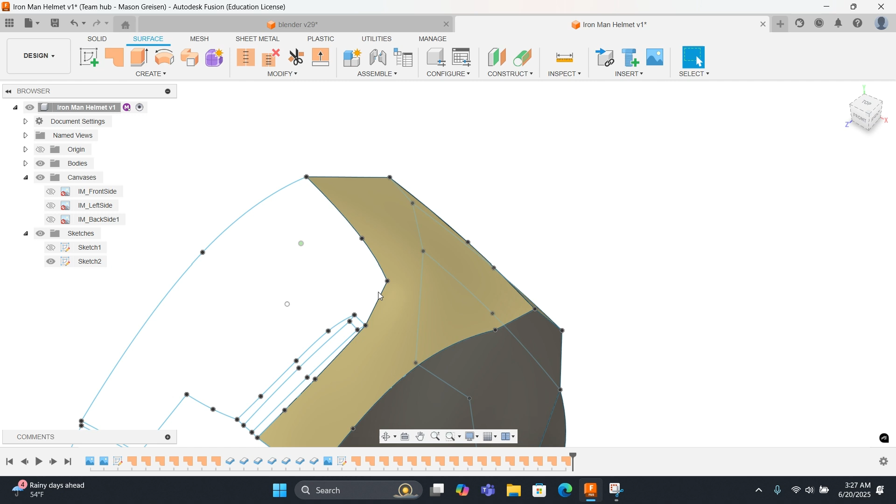Okay, let's try that, just as a quick fix. Perfect, boom. Does that actually look good though? Yeah it does, okay cool. Works for me.

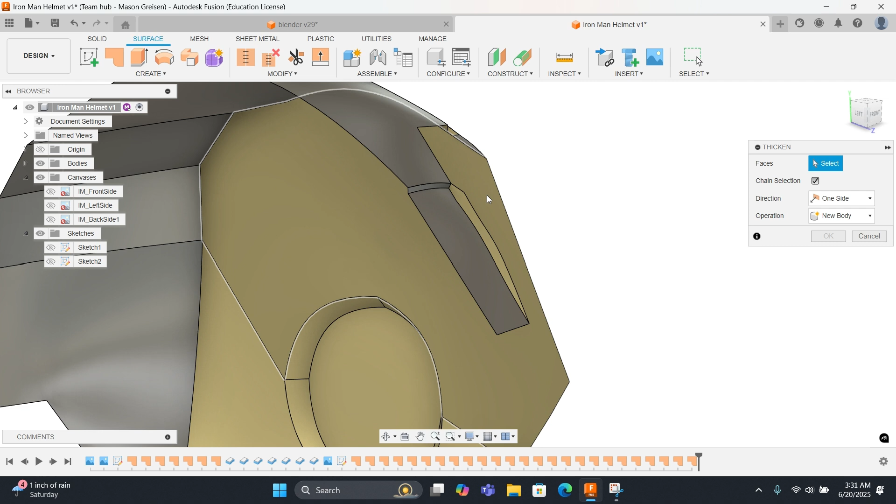Next, what we want to do is go over here to Create on the Surface tab and press Thicken. And then you're going to pick one of these faces, one of these like 100 bodies over here. And what you want to do is just click on one, and you're going to want to thicken it to negative 0.1.

Last time I did 0.05 and it did not turn out very good, honestly. It was a very thin mask if you saw the showcase video. And I want to make it better, so we're going to do that here. Okay, this one's already in the right direction, so you're all good. Just press OK.

Oops. Press thicken on the next one, body 18. And always make sure that it's facing inside of where you designed it, because you designed it to be kind of perfectly like - what's the word for it - I guess you could say the perfect look for it is on the outside, how you designed it. So if you thickened it to the outside like that, it would just look completely weird. But if I do the same thing to the inside, you're never going to be able to tell.

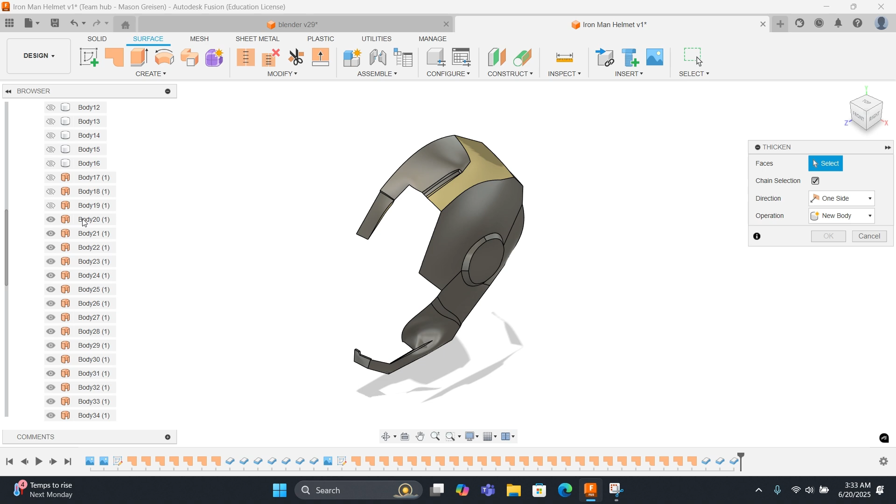So for this part, what I'm doing here is adding a little bit of thickness, even though I said not to do that, to this part right here. Because the last time I did this, this part was actually too thin and they all kind of fell apart. So I'm going to add a 2 right here, just to make it look a little better, because I don't think there was really anything attaching them together, and that made it just fall apart. So now you can see they're kind of overlapping a little bit, and that's perfect. That's exactly what we want.

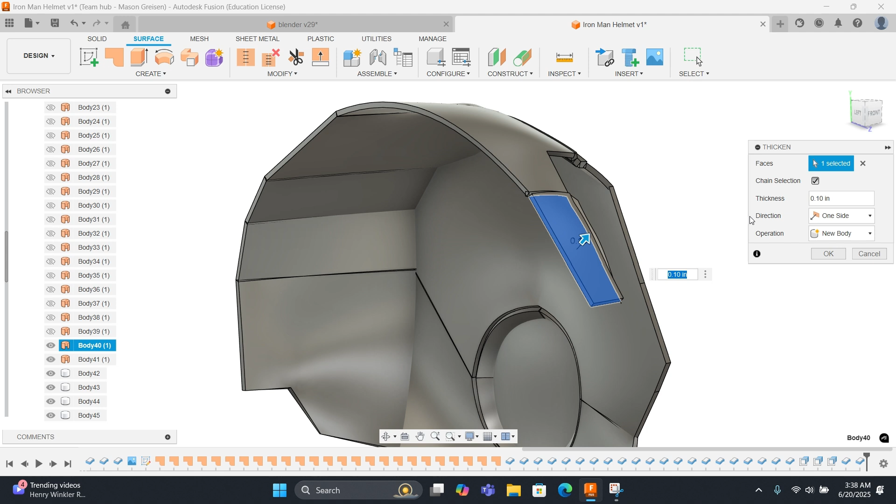And the best way to tell if you're thickening it right is just by the arrow. If it's pointing out, then you obviously don't want that. You want it pointing in, and you're going to add a negative symbol. It's pretty simple.

Where's that one at? There we go. It's perfect. Sweet. All right, that is your completed Iron Man mask. Actually no, there's one more step, sorry. This step's pretty important.

Obviously this is half an Iron Man mask, so you're going to want to mirror it, and the mirror plane is going to be this plane. You want to do new body, not join, just so that there's separate bodies that you can show and hide. And there you go, boom. That is your Iron Man mask complete.

And then this is the other part of it. Oh shit, I completely forgot to do this part. Oh my god, no, this is actually looking pretty seamless. I'm pretty happy with that. It's looking very put together, you know. Okay, let me really quickly go back and actually just do this part.

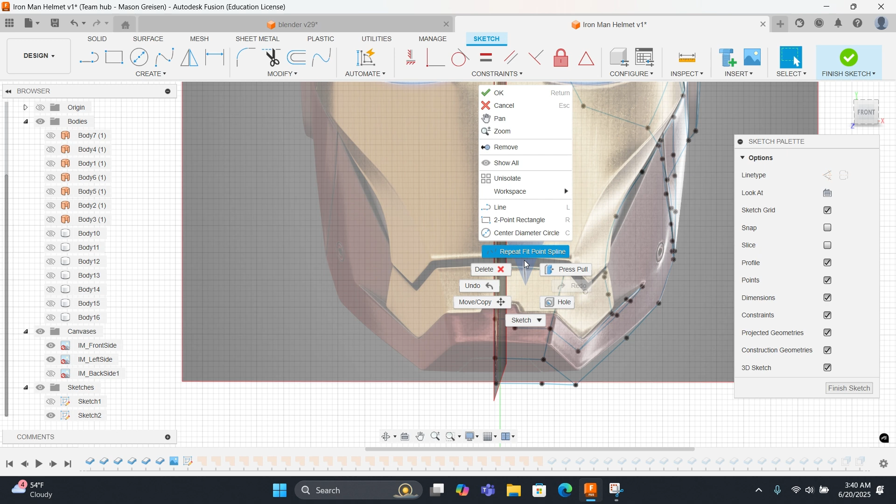Alright, for some reason the audio got messed up, not sure why, but basically what you want to do now is just mirror the rest of it. So what I'm doing here is I'm just going to select all the bodies, and we're just going to hit the mirror tool. Once you have it mirrored, your Iron Man helmet is now done.

So let me just scroll up and actually show the faceplate as well. And it looks good. There's a little gap in the mouth, but I think that's actually how it is in the movies, so I think that actually works out perfectly. Looks just like the movies. That's your Iron Man mask done.

There is one more step, however. You're going to add the appearance to it, which is basically the color that you see in the other file. How you're going to do that is you're just going to tap A on your keyboard, then go to Fusion Appearances, and scroll down. Let me check which appearance it was in this file. We go to appearance - it looks like it was the aluminum anodized glossy red.

So let me find that in here. Repeat appearance, scroll down. Where is it at? Okay, aluminum anodized glossy red. That does not look like the one.

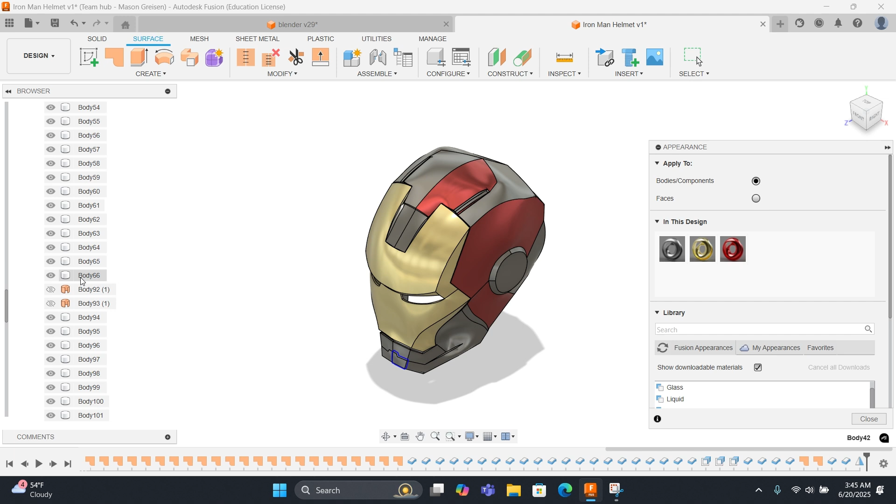Whatever, it's close enough. Okay, a faster way to do this is to just select all the bodies on the left side, and then you can actually just drag it over to the left side on the bodies instead of individually selecting like 100 bodies. You just want to shift click and then drag it over to all the bodies, and it'll automatically do it. Then just do that for the rest of the bodies on the other side that you mirrored.

And I actually did the wrong one for the mouthpiece right down here. That looks a little weird, so I'm just going to redo that.